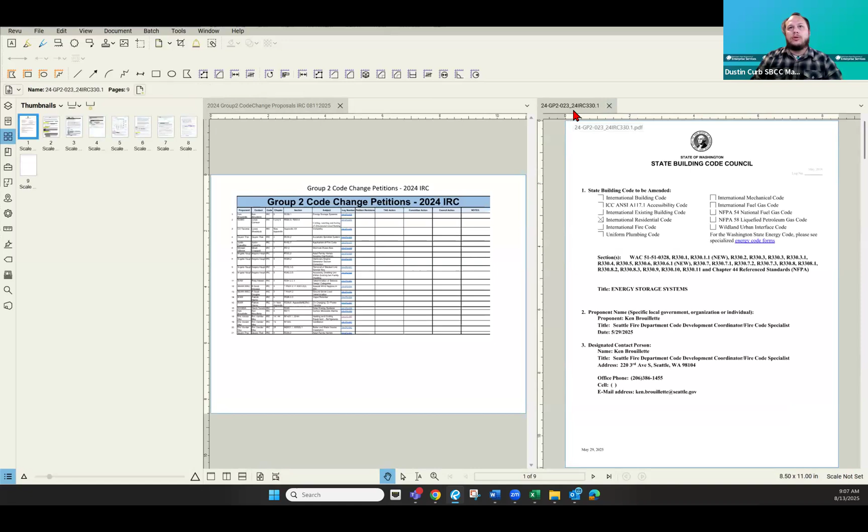So up first, I have a proposal on section R330.1, Energy storage systems, from Ken Brouillette. This is proposal 24-GP2-023. And I didn't expect it to open up like that. All right.

So Dustin, on the proposal, I have a few little slight changes to it. I don't know if you want to make the changes on the document while you're working, or I can show them because I have them highlighted in blue, so somebody could look at what was submitted and then the small changes that were made to it for clarification. So what do you want to do? I'd be happy to make changes, but I'll need to pop it open not as a PDF. So give me one moment here. Yeah.

And also during our discussion, at any time you need to look at NFPA 855, it's referenced in here. I have that available that I can share. If we need to share that, I'll probably have to stop my share and let you share that when I don't have that document available.

Ken, I will be happy to make some changes. You just point me to them and I'll get typing. Okay, we'll do the editorial things first.

So Ken Brouillette, Seattle Fire Department, in the fire marshal's office, put together a code change proposal based on the 2027 IFC code change proposals. The state of Washington, we've been ahead of the game and trying to be a code cycle above. We've done it for our 21 code by adopting the 24 language early. And now we're looking at the 27 language and putting it into our 24 code.

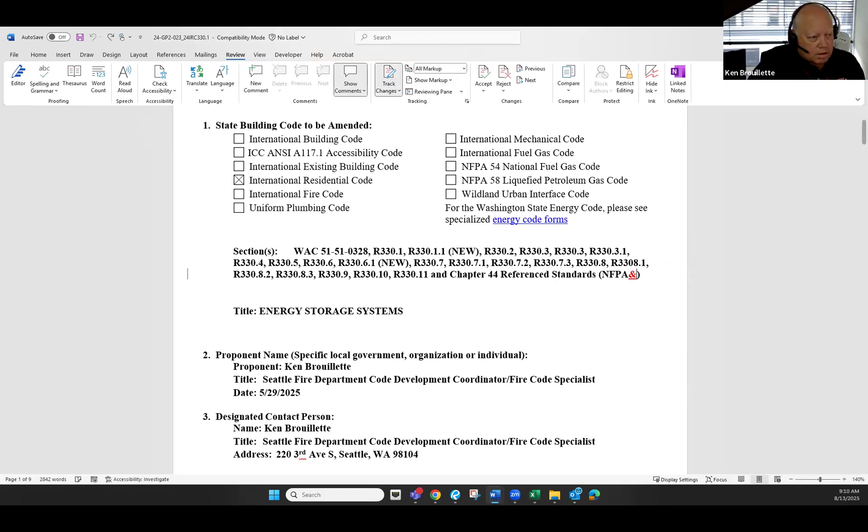All right, and then if you could just scroll down to the section, section 4, there you go.

All right, so what we have at the state is we have some current sections, and we're going to have to renumber some of those. So the first part is...

I'm sorry, let me turn off this phone.

The first change here is the R330.1. So in the model code, right now it says energy storage systems shall comply with this section. And the 27 code amendment clarifies a little bit, and it talks about if they have an aggregate capacity of 1 kilowatt hour or greater, shall comply with Chapter 15 and NFPA 855.

So why are we doing this? The NFPA 855, during their code development process, just finished the 2026 edition, and it's available for pre-sale right now. So it's gone through the entire process. They're just printing it up right now. And that's where all the latest and greatest code provisions are located right now, in 855.

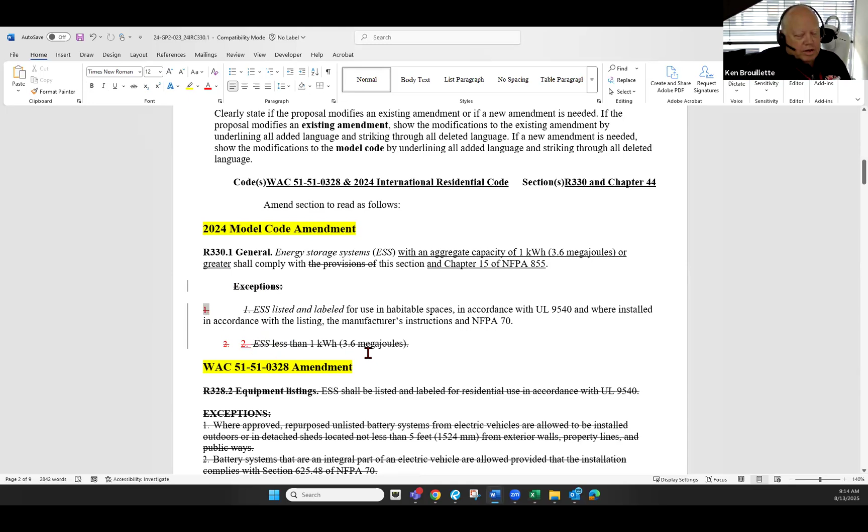So this next part might be a little easier for me to show, and then you can type on your document. So if you don't mind, let me share here. There you go.

Cool. So what I've done here is add in this R330.1.1, which is a section that was brought up for the IFC, the 2027 change, for compliance with NFPA 855 only. And it says the following: ESS systems shall only be required to comply with 855.

So what this means is if you have one of these, you just use 855. You don't use the rest of the fire code. And it says here, ESS systems that comply with all the requirements of section 15.1.3 of NFPA 855, which is this section up here. And I will help show you a little bit here, because this is when it gets a little fun.

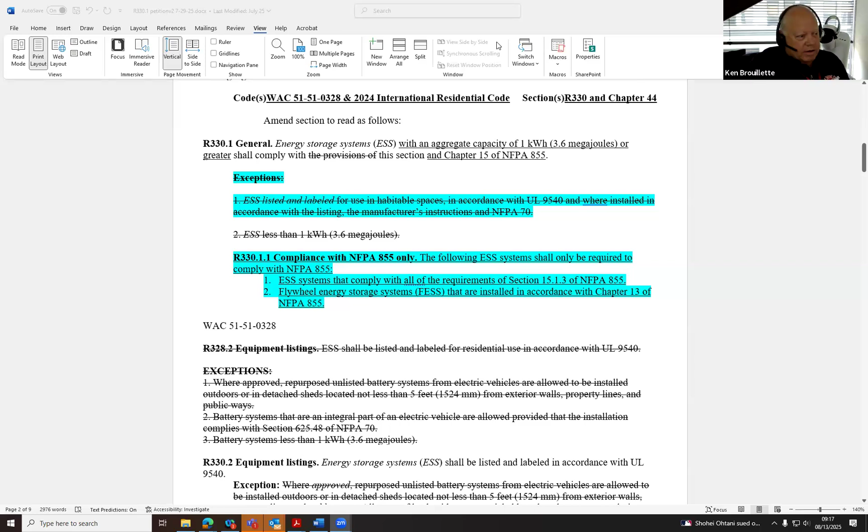All right, I'll let you take back over. Do you need to see this still to keep typing? Just a couple more seconds. Okay.

Okay, you're good. Thank you, Ken. I see Patrick, I might as well call you since I see you. I was just going to suggest, since we don't have a ton of time today, if you just want to run through it with your changes, Ken, and then we can always bring it back at a future meeting with a revision before we take final action. Yeah, so let me just do that with my changes in blue. Okay, if that's all right, I can do that. That makes it easier, that works.

So the other change is under the equipment listing section here: energy storage systems to be listed and labeled in accordance with UL 9540. There are some exceptions for lead acid, aqueous nickel based, and aqueous metal air batteries, but they all still have to comply with this specific section of NFPA 855. So that's just added in there as a reference.

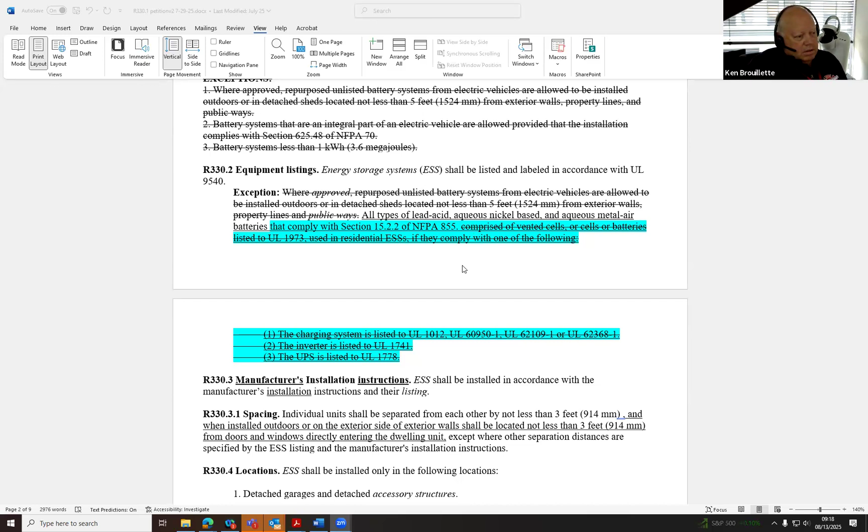And why this is all deleted here is because that's actually that section of NFPA 855. And again, Dustin, I can email this over. I'm done so far, I'm keeping up, but if I get this one back it'll make sure I don't mess it up.

Okay, and we're almost done with the blue stuff, the changes. The only thing I did here at the very end, I had the wrong reference numbers here. I was pointing to the older reference number that was used, so I just updated it.

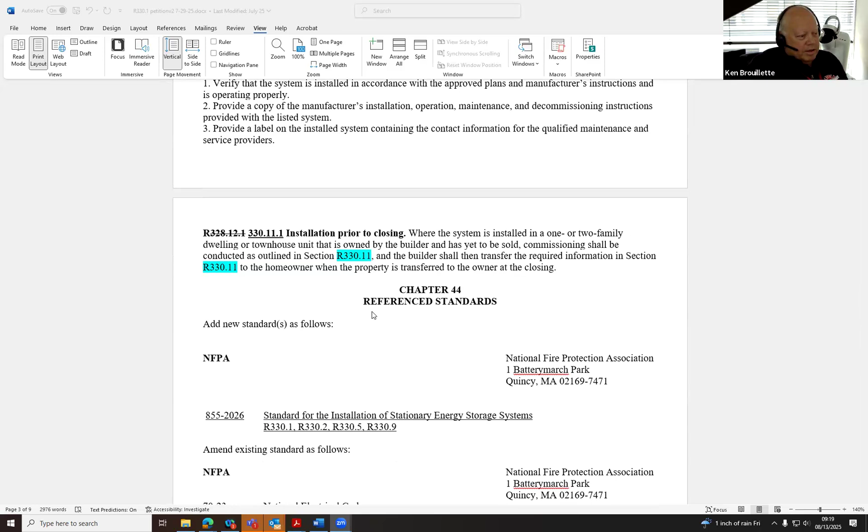And then in the reference standard section, NFPA section, I updated the additional reference sections here and deleted the ones that were wrong. And then the UL 9540, I just updated it to the 2023 edition, and also added in the March date.

I see Quinn's got his hand up. Yeah, so the quick question is, I'm looking at the IFC, the 2024 IFC, and 855 is still referenced to the 2020 version. So would this be a potential conflict if we did the 26 on the IRC, whereas the IFC is the 20? No, I believe my code change proposal for the IFC... because you're talking about the IFC, right?

Yeah, and I'm looking at the code change proposal that you submitted, and I don't see that. So in my public comment, when and if it ever gets out there in the real world, that's going to be my public comment, to update it to 26. I could not do the 26 because it wasn't ready enough, since they hadn't gone through the second reading yet.

Got it. Okay, yeah, that's the reason I kept it at 23. Yeah, because I'm looking at your IFC proposal and it doesn't have any reference to the 855. Yeah, I couldn't, because they just had the meeting, just finished it up, so I couldn't quite go there yet. But that's going to be part of my public comment when, if we ever get that chance.

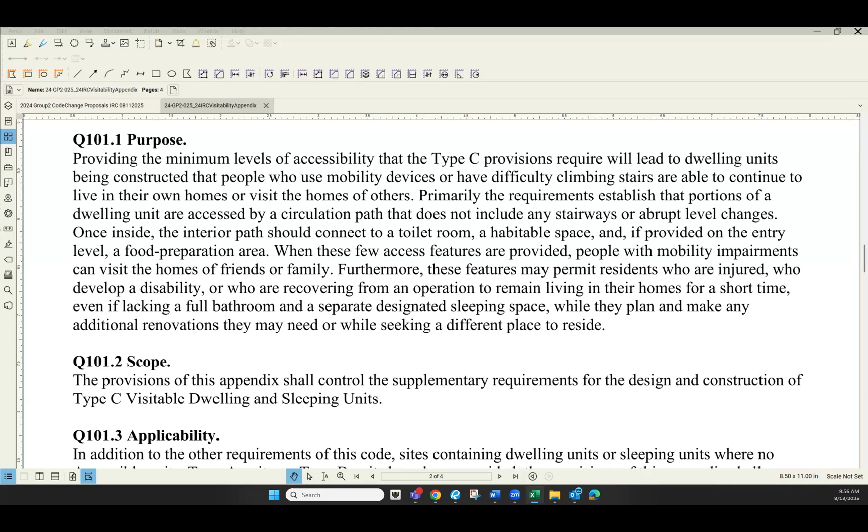All right, seeing no other hands up, we'll move on. And thank you, Ken, for presenting.

The only way you currently get to the sprinkler system is through the definition, which then takes you to the RCW. I looked up the RCW, and it's item F, that sprinklers are required when you have more than 6 and less than 8. So it's already a requirement, but you have to go through multiple steps to get there. So this is just a clear way for designers and building code officials to basically say, yeah, you've got to do it through the IRC, rather than jumping around.

So it essentially brings the requirement that's only in WAC at this point to the code. Not WAC, RCW. Oh sorry, you're right, my bad.

Go ahead, Patrick. Yeah, I mean, I generally don't have any problem with this, but I was wondering, my concern with trying to implement stuff that's in RCW that's very specific, is what if the RCW changes during the code cycle? It could make it confusing. Is there a way we could point to the RCW so that it's clear that's where this requirement is coming from? Then if something were to happen in the middle of the code cycle, it would at least be easier to know that.

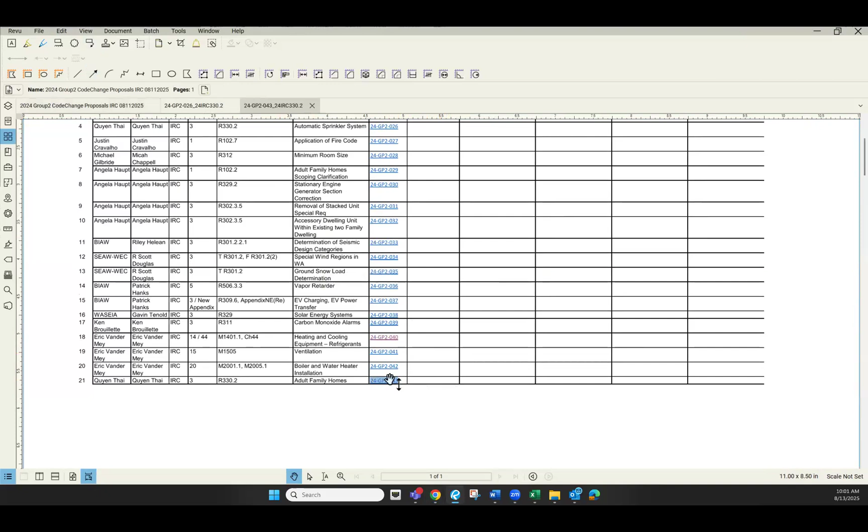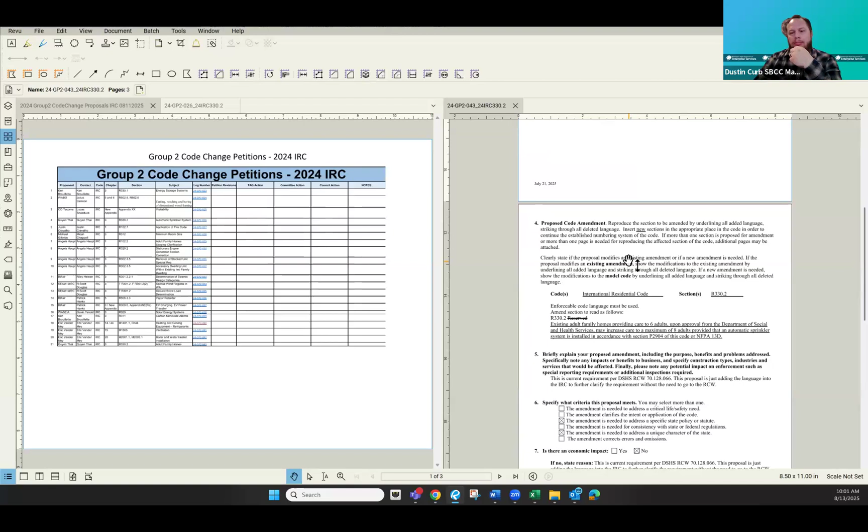So if you go down to the very bottom one, Dustin, that one. Should be the same. I don't think... this might be the only one, a duplicate, and I may have missed this one. Is the language in R330.2 different in each of these proposals? So do we have a favorite, one over the other?

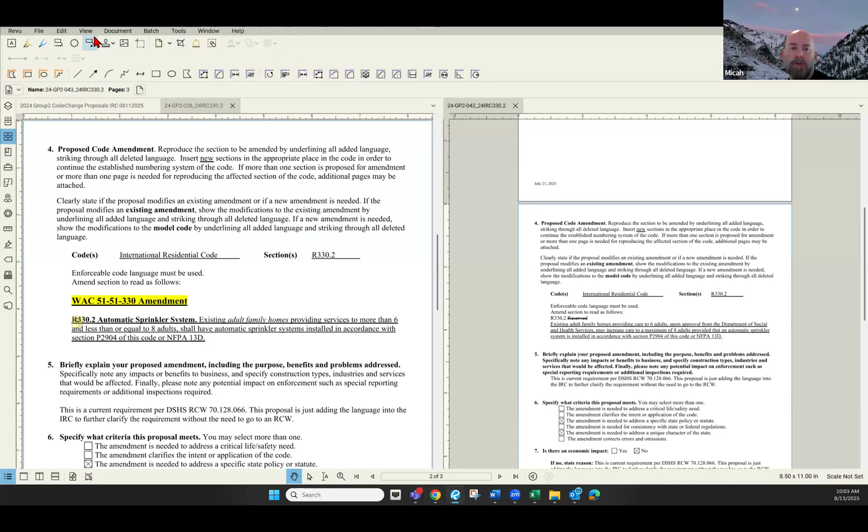That wouldn't undo. I believe the one on the right is technically accurate, but what's on the left is how it's supposed to be submitted. We're supposed to start with the ICC language, which doesn't exist, so it would actually show that this is new language coming into our code. The one on the right is the Washington WAC and how it's shown, and that's not how we're supposed to submit the proposal. So I believe the one on the left is the accurate one for you, Quyen.

Okay, and then I would say stick with the current language we're proposing because it does match the definition when we start getting there, the up to 8 adults or whatever, things like that. There's 10 different ways you can write it, but I think this aligns more with the WAC language from DSHS, however you say it.

I believe the one on the right was part of the alignment we've been doing with them for the last couple of years, where they've been working closely with code officials to get language and components aligned, so we're not out of step. Many of you may not be aware, we didn't have much alignment previously - they were allowing waivers for up to 30 kids in a residential house at one point. So this is just further aligning the codes and their requirements, since we're now seeing these come into our offices. Hopefully you'll support it. Thanks.

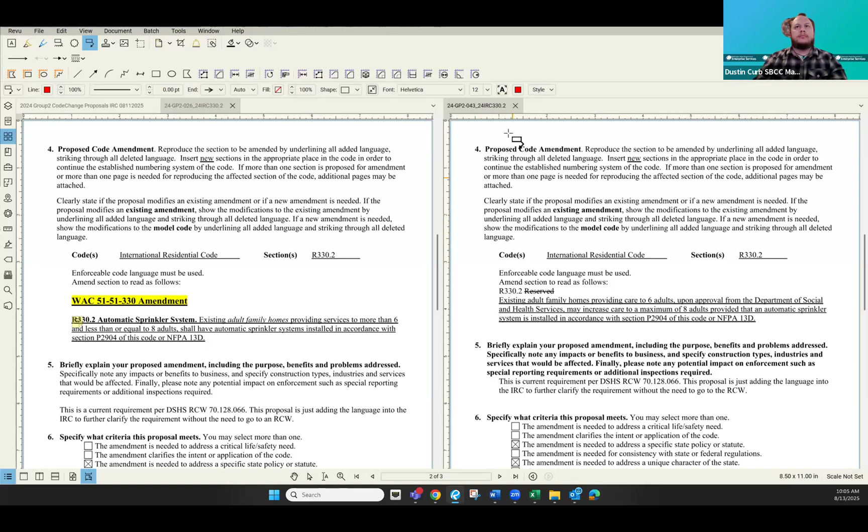Would it be appropriate, Quyen, to withdraw this one on the right-hand side, number 043? Correct. I think that was my original, and we changed it to the one on the left, so I'm not sure how you got the one on the right. It might have come separately and been far enough on our spreadsheet that I didn't correlate them. No worries, get rid of the one on the right.

Any other questions for Quyen on number 026? The code section will probably change based on the model code. Yeah, we'll just make sure it fits in where it needs to go.

Jen? The existing adult family homes here seems a little weird. I get that in the definition because adult family homes have been 6, and DSHS will only allow existing ones to increase, but that's more their deal, right? But here, when is a sprinkler system required? I don't know that we need to condition it on being existing - I just want us to think through that more. Whether it's new or existing, they could change, because they have that deal where they want to wait 2 years before allowing an increase. That may change - they may say if you're putting a sprinkler system in, go ahead and start with 8. Then we'd have this situation where only an existing one requires it, and a new one wouldn't. So maybe we just get rid of 'existing'.

So just get rid of the word existing and start with 'adult family homes providing services to more than 6.' And I do like Annie's suggestion to just say 7 or 8, or 'more than 6' could be enough, since DSHS will limit them to 8. That's the problem with that definition - DSHS is going to do some things, but let's just put in here what we are requiring. Whether or not DSHS requires a sprinkler system, I think this group would want one for 7 or 8 people.

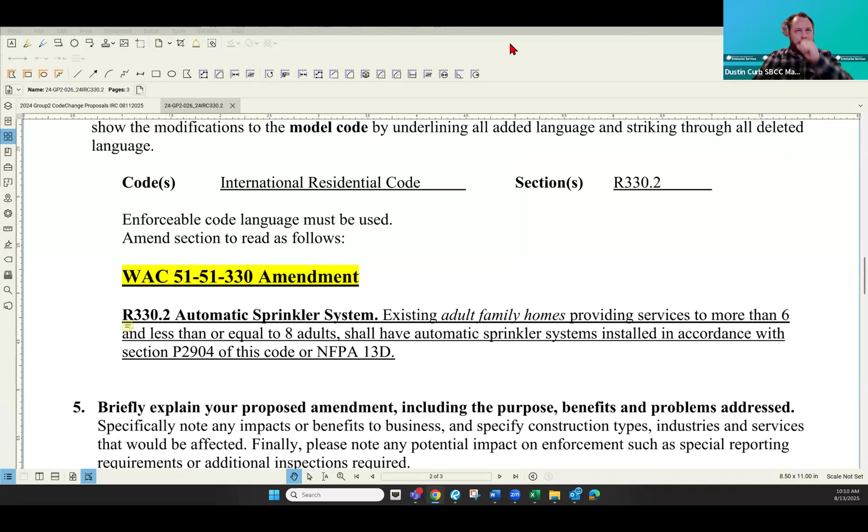To Justin Cravalho, IRC section R102.7, application of the fire code. This is 24 GP2027, and Justin is online with us. Let me get it pulled up and I will turn it over to you to guide me.

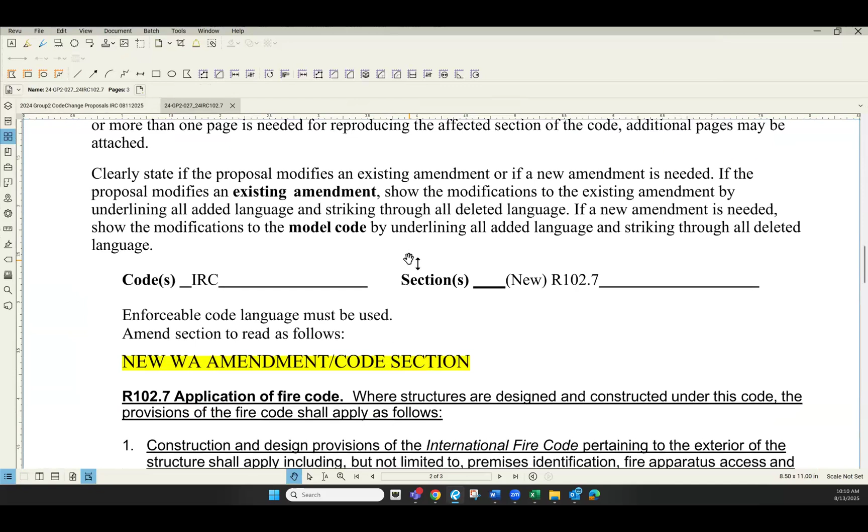All right, thank you. So I just wanted to be clear with this one: this is not meant to replace or amend any existing sections, it's just supposed to be a new section added in. This is essentially adding in language that's already in the fire code, copying that over and editing the names of the codes to fit where it is now.

It was brought to our attention that number 2 in this amendment would potentially conflict with duties and responsibilities of the building official, so we were asked to strike number 2 from the proposal. But other than that, it's just meant to be a clarification of the code to make it clear that in addition to the residential code, you also have to comply with the fire code if your jurisdiction adopted those access requirements.

So there's a plan then to submit a version that has just number 2 struck from it? Yes. As well as any other amendments people would like to see.

Any comments or questions for Justin? Ken?

So you'll just need to update the reference standards section to point to 102.7 since you're referencing the IFC, just for clarity.

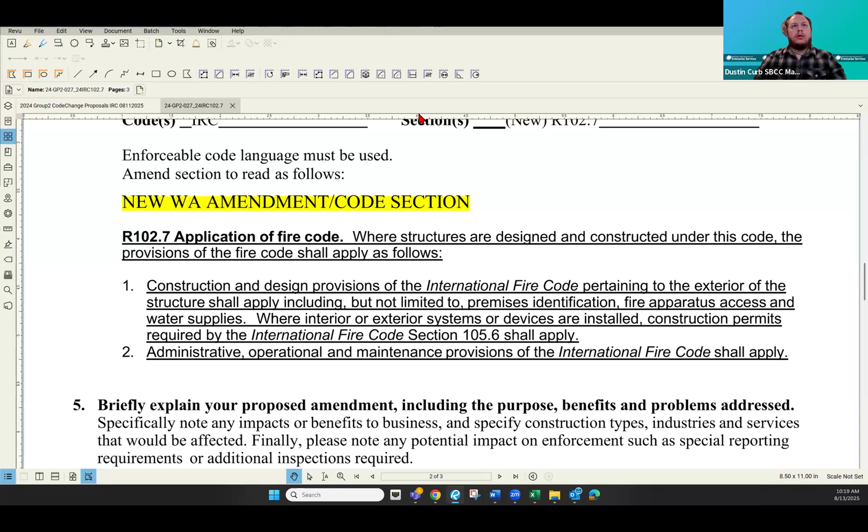Moving on to Michael unmuting so he can present on number 028 for minimum room size in section R312.

Hello, good morning, Michael Gilbride. I'm a building plans examiner at the City of Seattle, and our proposal is for the minimum room area. The overview is basically we are shifting the requirement from a minimum room area to an overall minimum area for a dwelling unit. So dwelling units shall have at least one habitable room with a minimum floor area of 120 square feet and not less than 7 feet in any horizontal dimension. This is a change from requiring every habitable room to be 70 square feet.

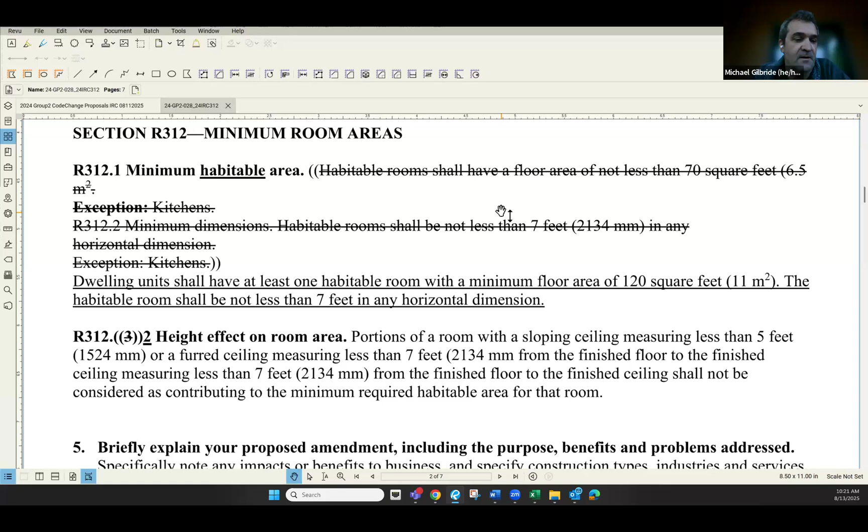The purpose of this is to allow for smaller separate rooms. Typically, we've been seeing offices off of the main area, a bedroom or the main room, that are separate and less than 70 square feet, but don't present any fire safety, health, or livability issues because they're in a larger dwelling unit or house. So Dustin, if you want to go down to the diagrams on the last page, that might be easiest.

So I think it's all the way at the end. There's some diagrams, here you go. So this is sort of what we are seeing.

I think the code has remained the same for a very long time, but the residential trends have changed, and this configuration seems to be more and more prevalent.

In addition, currently the code doesn't really have an overall area minimum for dwelling units. This is the only area requirement in the residential code.

So our change now allows for dwelling units to have a minimum area requirement to meet minimum livability standards. That is the overall intent of this proposal: to allow for smaller separate rooms, provide some design flexibility, and also bring in a minimum dwelling unit area as we see more ADUs and DADUs start to come into play.

And if you scroll down to the other diagrams, you'll see this is what can currently be built under the IRC. And then this would be allowed, and this is sort of the minimum area, an example of a small minimum dwelling unit.

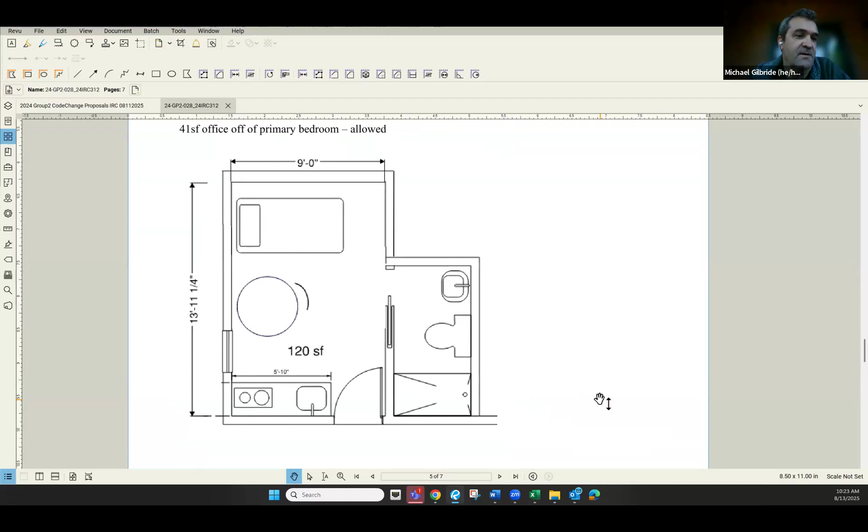So I think that is the purpose, to provide the flexibility and also start to address some of the changes that are coming with the middle housing and other legislation. And Dustin, if you want to just scroll up to the benefits, I think that might be a good place to end.

There you go, right there. And yeah, I'm open for questions and discussion.

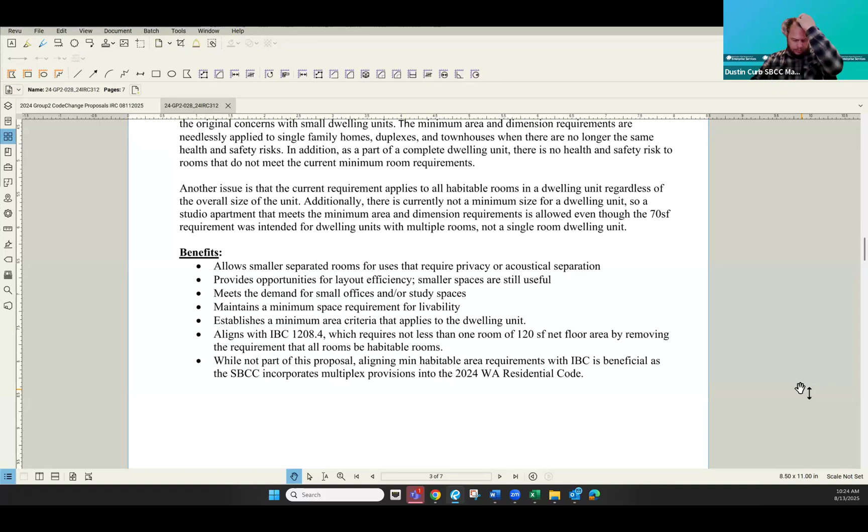Patrick: Yeah, thanks for bringing this forward. I actually like this, I think this is overall a good change, and I've actually lived in a 120 square foot dwelling unit. It's a little tight, but it gives you an affordable place to stay when you're going through college or just starting out.

I was wondering, I know that the 120 square foot is kind of the minimum in the IBC, and I think it's been that way a long time in New York, but is there any reason we couldn't go lower, like say 100 square feet?

You know, I think that has been discussed, and we go back and forth. I think we kind of landed on 120 square feet because of the alignment with other codes. I think where that exact livability minimum is, is always sort of a hard question to pin down, whether it's 120 or 100.

I think 70 seems very small to me for livability. Trying to fit all of the requirements for a dwelling unit in that small of a footprint is very difficult. So I think 120 is where we ended up.

Okay, and then I have one other question. I think my only potential concern is, theoretically right now you could have a dwelling unit with rooms that are 70 square feet, but under this they would have to have at least one bedroom that has 120 square feet.

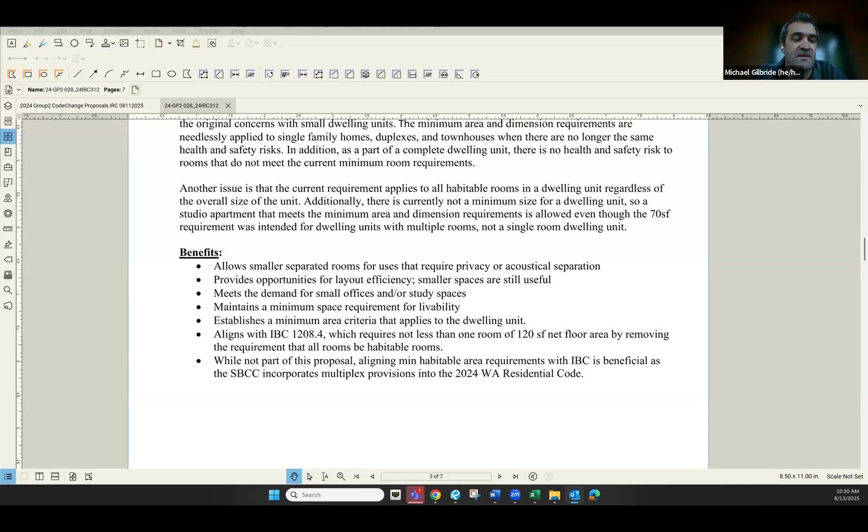That's great, but can we scroll back up to the code change proposal? You don't mind, Dustin, and we can have a little more discussion there. I know a lot of folks are talking about the minimums right now. In the residential code, remember this is a residential code change.

You could have your one habitable room be 70 square feet at this point without a bedroom. That's what the code allows. So thinking that you're getting larger now, you technically are not required to get larger now. This is actually setting a little larger minimum for that one room that you are required to have. Now, when you provide other habitable rooms in your design, those would have to meet the 70 as the current code reads. But again, you don't have to provide those other habitable rooms in the residential code.

So I definitely want to point that out. And then some of you may already be aware, the state legislature did pass some language that says we need to look at allowing smaller dwelling units in the building code. So there are proposals that are going to come in for that, but this is somewhat aligning with that direction, in that we're providing some much needed flexibility on the dwelling unit sizes and minimum room sizes in the residential code. And then we're going to get the building code later. Anyway, thanks.

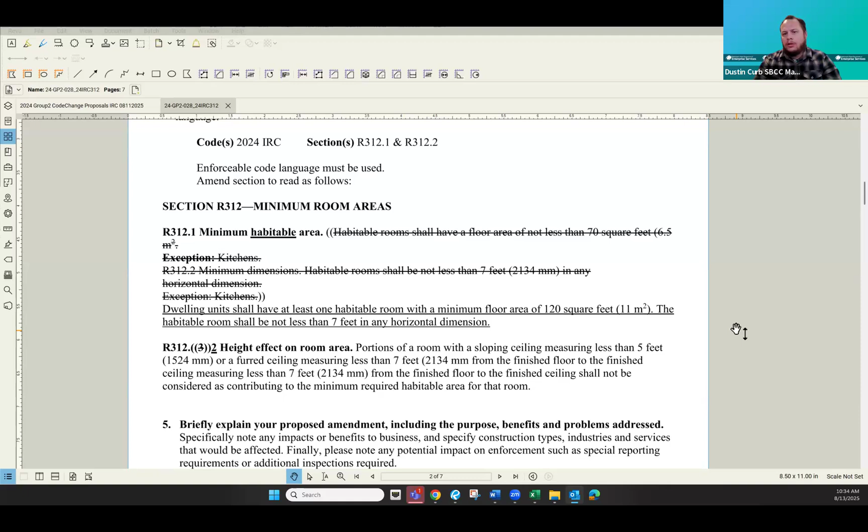Any other questions or comments? All right, seeing nobody else unmuting or raising hands, appreciate it, Michael. And we will move on. All right.

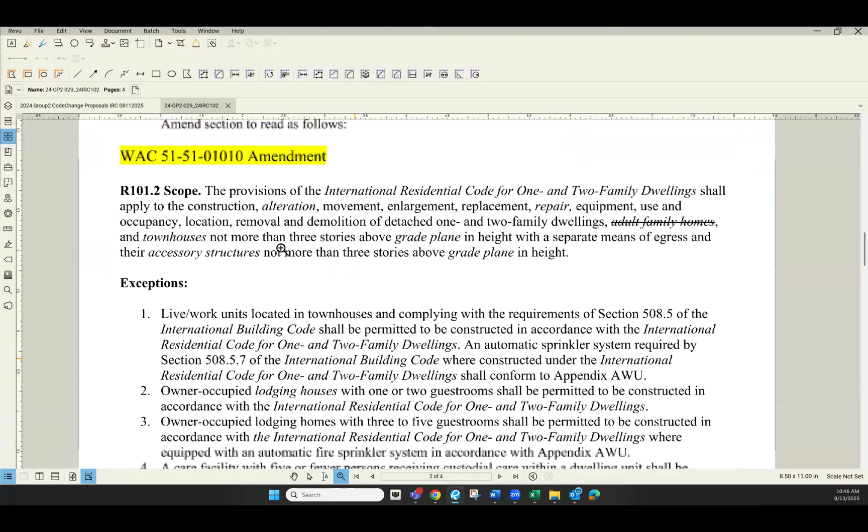Yeah, this one should be fairly easy, I say that. So it's basically a clarification to go along with an SBCC interpretation that was made earlier, last year I think. It just has to do with making it more clear that adult family homes are not required to be sprinklered in order to be built under the IRC. So instead of having it in the scoping where some people were trying to throw it into the care facilities exceptions, I added it as exception number 7 that says adult family homes shall be permitted to be constructed in accordance with the International Residential Code for 1 and 2 family dwellings. So I don't know if there's any questions on it.

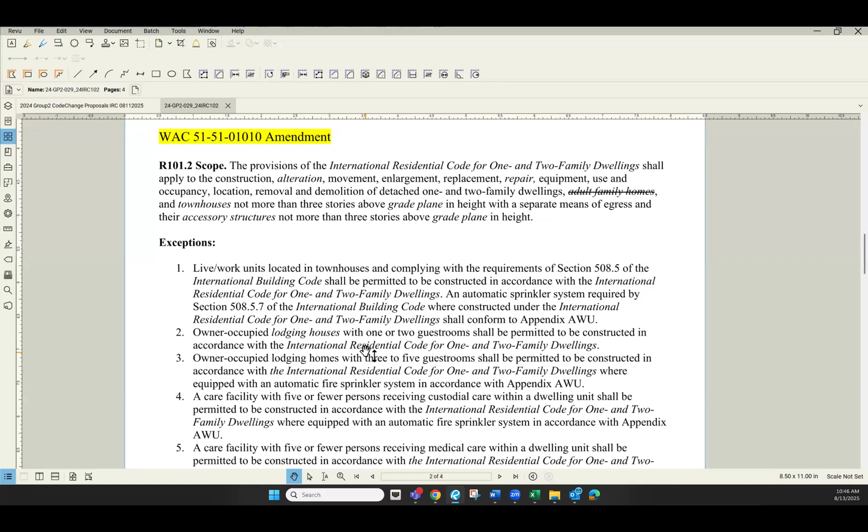See some thumbs up in the group. Anybody with comments or questions for Angela? All right, see nobody coming up. We will close that one.

The next one is also from Angela, R329.2, stationary engine generator section correction. Oh, I want to withdraw that one. Okay, that's quick and easy. So let me update some notes here real quick.

Okay, the next one is also from Angela on R302.3.5, removal of stacked unit special requirements. This is proposal 24 GP2031. So for this one, this is a proposal to remove this new section that was added to the base code. Basically, it's a section that was added to try to counter all of the states that have been removing the sprinkler requirements from the IRC. What this section does is it adds a sprinkler requirement back in for just stacked duplexes.

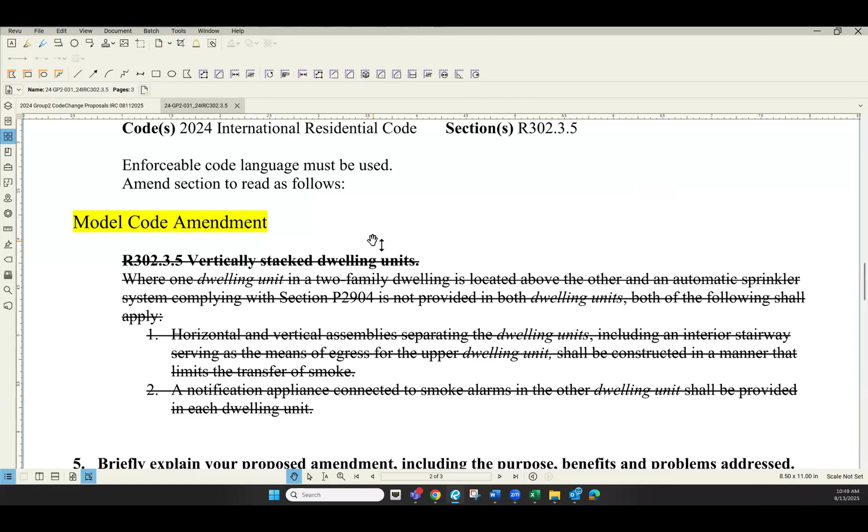Which would go against the state's current stance on making sprinklers an option in the code. So again, are there any questions? I see a thumbs up from Patrick. Nobody's unmuting. Thumbs up from Mariko. All righty.

Moving on. This is also Angela's proposal for R302.3, an accessory dwelling unit within existing 1-family dwelling, proposal 24 GP2032.

Okay, so this one is a little bit more complicated. First off, it removes the term accessory dwelling unit and just refers to it as a new dwelling unit. The term accessory dwelling unit is not defined in the IRC, but accessory structure is, and they don't mesh together. So in this proposal, I've gone on to remove the word accessory and just make it new dwelling unit.

Also clarified that this applies to an existing 1-family dwelling unit, that you can't do this like within a duplex to make it 3 dwelling units. It does change a few things on it, so I want everybody to read it and make sure that what it says, they agree with. It also removes exception number 2 from R302.3.1 because it's a duplicate of what's already stated up in R302.3. So instead of having it in 2 places, it's now in just 1.

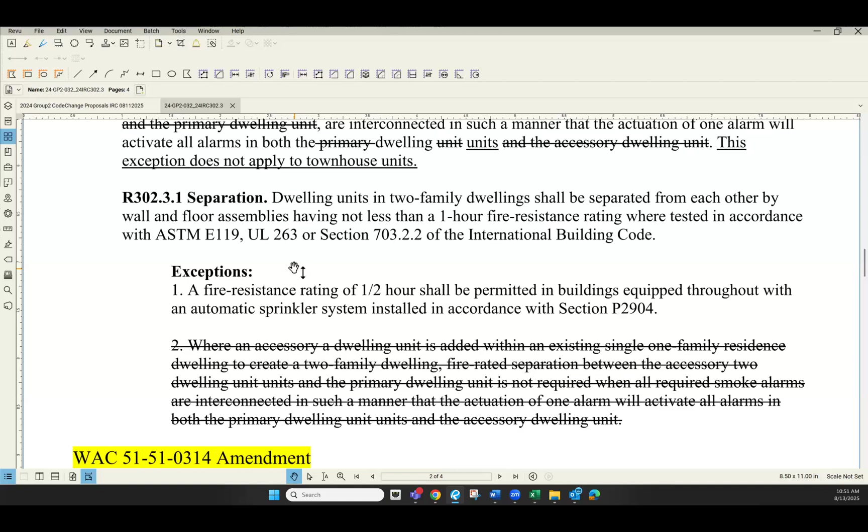And then the second part has to do with, in alterations, repairs, and additions, it's referring you back up to the top when you're doing, where 1 or more sleeping units are added or created in the existing dwelling unit. So that section is just reverting you back up to the top to make sure you are complying with section R302.3 for that new unit. And again, it's some language changes to remove the word accessory.

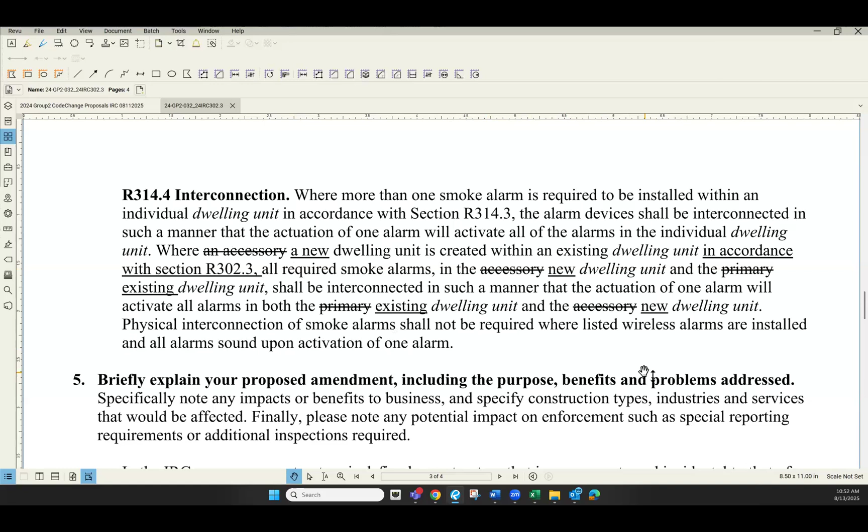Alrighty, Ron, I see you unmuted. You have a comment or question? Yeah, currently, if you have an ADU, it does not have to have the 1 hour separation from the main dwelling unit. Is this taking that exception out? No. Okay, thank you.

Jen: I think it is, because adding a dwelling unit inside a 1-family dwelling would create a 2-family dwelling, right? When you add another dwelling inside a 1-family dwelling, now that's a 2-family dwelling, and then it would need to be separated. Right, but it says 1 new dwelling unit constructed within an existing 1-family dwelling need not meet the construction requirements of 302.3.1 through 302.3.5, which are your separation requirements. Okay, thanks, sorry, it's so hard to try to read this and think and listen at the same time.

That's where instead of saying it doesn't have to be considered a separate dwelling unit, the confusion has been: if you're not considering it a separate dwelling unit, are you requiring access to the electrical panels, separate heating controls and things like that? Because if it's not a separate dwelling unit, none of that technically should be required, yet it's still sort of a leasable dwelling unit. So that's what we're trying to clear up by removing 'considered a separate dwelling unit' and just saying it doesn't have to meet the construction requirements. Because when this was put in the code, the proposal was about basements or garages where you can't really make an existing wall one hour, or make head height without altering the ceiling. So again, it was more just to get out of that separation, and that's what I'm trying to make more clear here.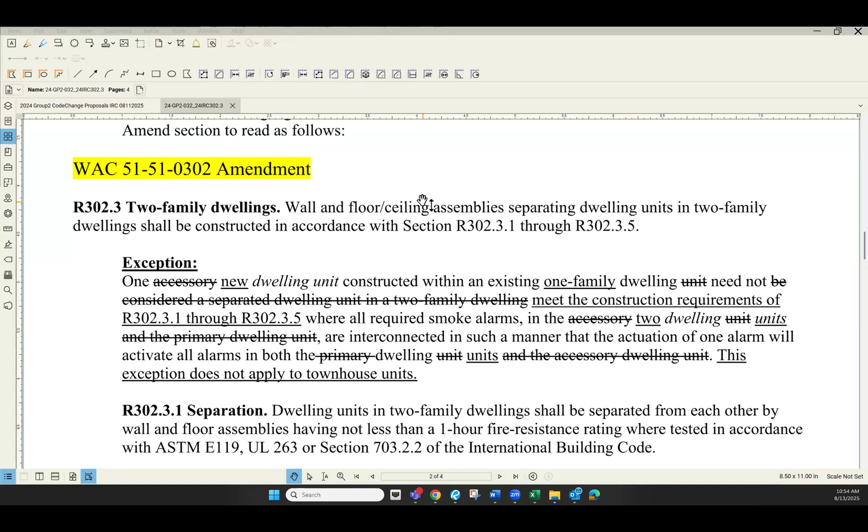Any other comments or questions? All right, nobody's unmuting, no hands are coming up. So I believe that was your last one, Angela. I appreciate the presentations.

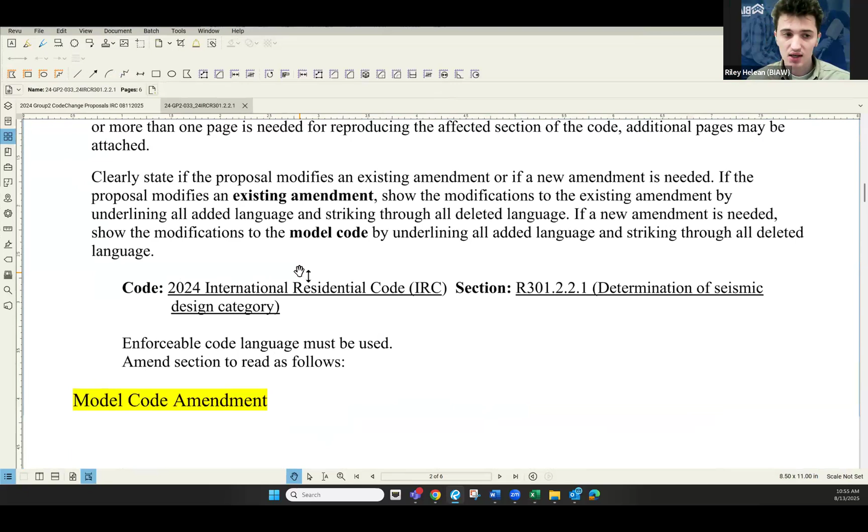All right, now we are on to a BIAW proposal from Riley Helean on section R301.2.2.1, the determination of seismic design categories, proposal 24 GP2033. I think I saw Riley on earlier. Yep, there he is, so the floor is yours. Yeah, my name is Riley with BIAW. We received some member feedback on this, so we're proposing that we do not adopt the seismic design category map from the 2024 IRC. Instead, we're recommending we retain the figure from the 2021 IRC.

Essentially the 2024 IRC changed to using one seismic map. They were hoping that would streamline the viewing of them nationwide. They acknowledge that this results in some more conservative estimates, making many coastal regions jump up. I don't know if you'd be able to pull up the one from the 2021 IRC for comparison, if that could help. It jumps up many of the regions on the Pacific coast to SDCE, which is the highest risk category. Washington's soil and earthquake risks are different, so this map can overestimate the danger here. It results in overbuilding and higher costs, so we're proposing to retain the 2021 map.

Thank you. I'm still trying to pull up the figure from the 2021 code, so give me just a moment. While I'm doing that, is there any comments or questions for Riley?

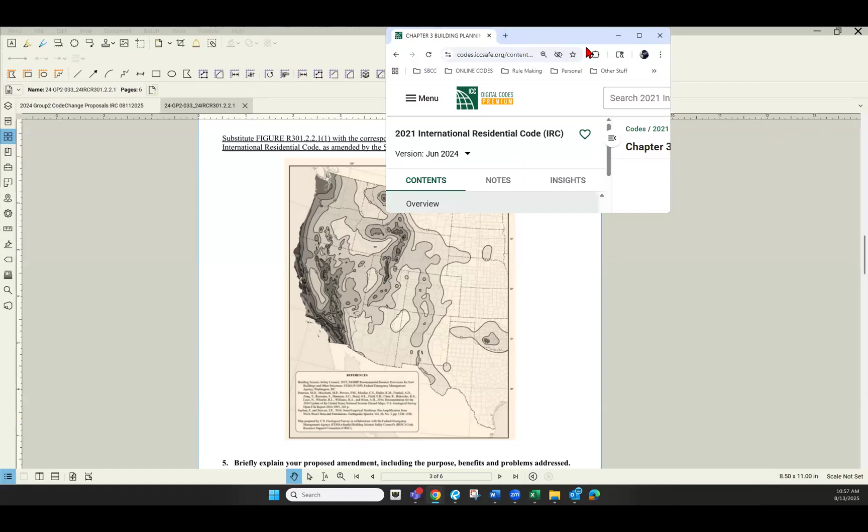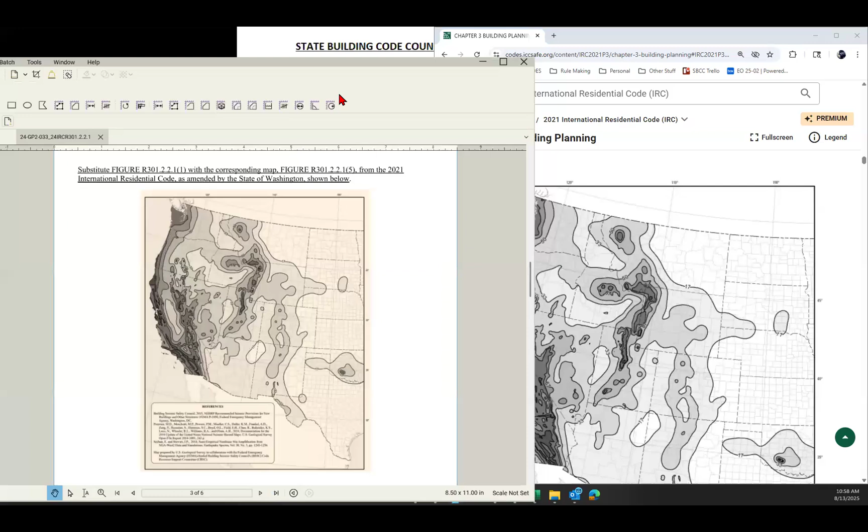Annie: just a couple of observations. It'd be interesting to get comments from the engineers on the call. The peninsula at this point has a small dot of E over the city of Port Angeles; everything else is D. What we're finding by using the ASCE hazard tool is that we're not finding E in Sequim or Port Angeles, not finding E anywhere on the peninsula. One question I have for the structural folks is whether the ASCE 7-22 is being adopted by reference in the 2024 codes. I had the one engineer we have on the peninsula look at this and give me some background, and if the definition of S sub 1 changes, we'll see additional E along the coast only. Also, if you look at the IBC seismic map, you'll only see E along the coast. The challenge is that as soon as we get into seismic design category E, everything needs to be engineered, and that's tough when you're on the peninsula with just one engineer. It winds up being a real tough ask, especially if we're not finding that it actually meets those criteria.

I also received an email from somebody who's not able to be at this meeting today, who wanted to submit a comment for this particular proposal. I'll pause for Josh, and then I'd be happy to read this email for this individual.

Yeah, I was just going to comment on some of the questions addressed towards engineers on the phone, since I'm one of them. The ASCE 7-22 is being adopted by the IBC. As an engineer, I'm designing every house to the IBC. I don't know many engineers who are using the IRC for design. So unfortunately, as it comes to prescriptive analysis, I'm going to be a little less experienced, but I will say the ASCE 7-22 does have a general increase in seismicity across our state.

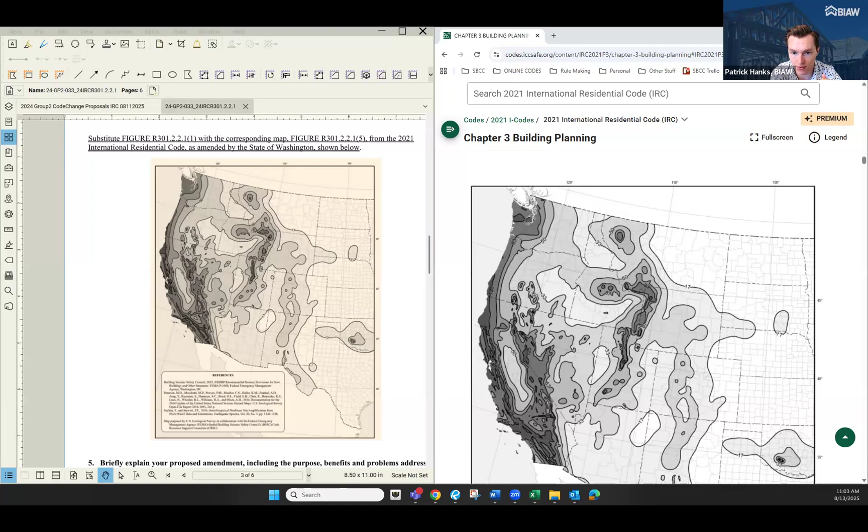Patrick? Yeah, I think the concern here is, while the proponents at the ICC level said that it was based off data, when you go look at the hazard map tool for Washington and go into these areas that are now classified as E, you're not seeing that in the tool - they're not classified as E. So it seems like they made some assumptions, some generalizations, when they made the maps that result in large portions of Washington being upgraded in seismic zone, contradicting what the tool said.

I know there's a desire for consistency, but if we require structural engineering for every single residential structure, not just on the peninsula, but parts of the Seattle metro area too, and other parts of Washington, that's going to significantly increase not just the cost, but if you can't get a structural engineer, it could delay your project, affect the feasibility, and affect a lot of things really negatively.

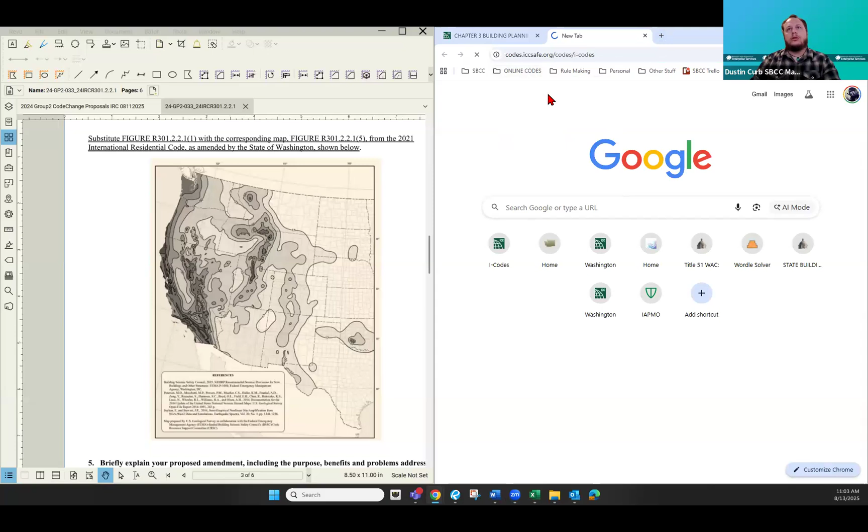Annie: Dustin, could you bring up the seismic map from the IBC? I think it's 1613.9 or something along those lines? Yes, 1613.9. Are you looking for the 2024 map or the 2021 map? 24.

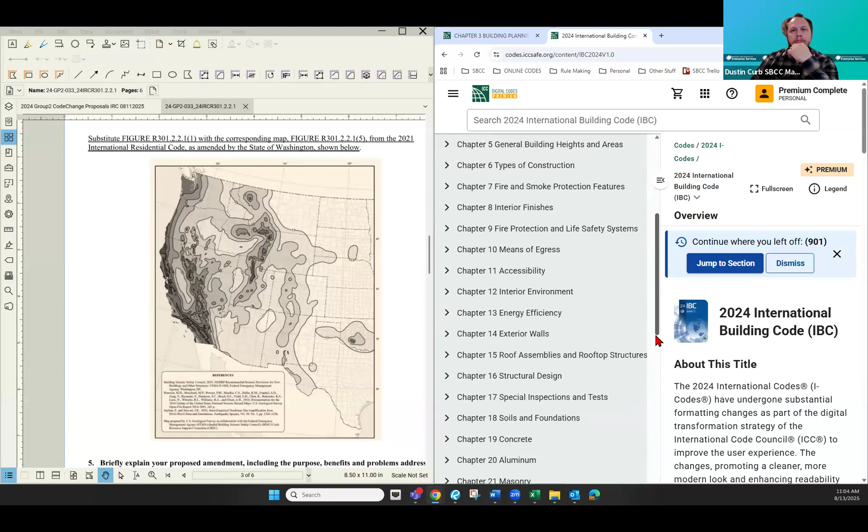While I'm pulling this up, can I entertain another comment from Julius? Go ahead, Julius. Can't hear you, Julius. Can you hear me okay now?

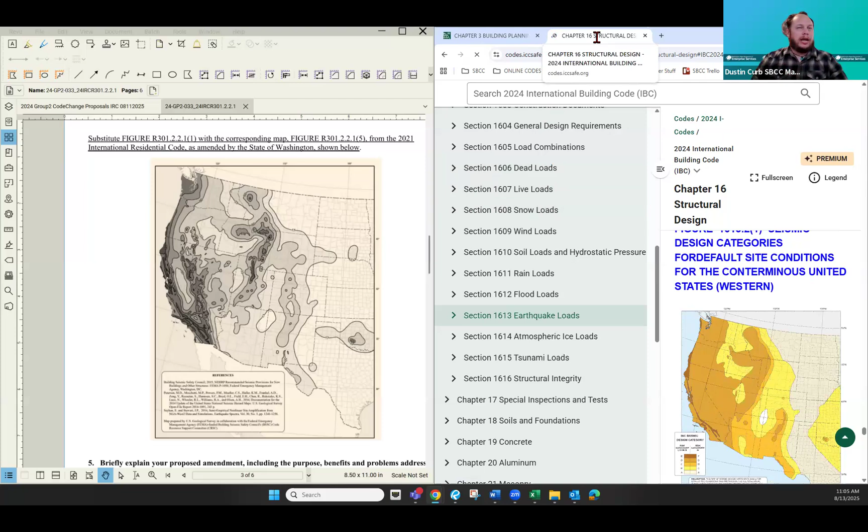Yes, yeah. Can you go to IRC 301.2.2? That's the alternative determination for seismic category. Okay. What I was going to say is, if I'm going to different code sections, let me just finish up with Annie's comment, and then we'll navigate to the IRC.

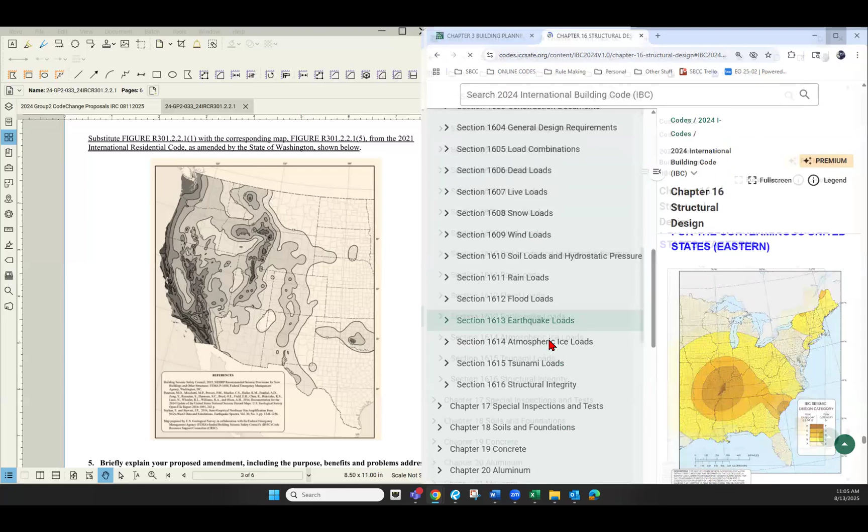Is this the map you're looking for, Annie? Yes. Yeah, if you go up to the western part of the country. Whenever I change the size of the window, it bounces around, so apologies. Okay.

This is more consistent with what the engineer has found when looking or utilizing the ASCE hazard tool.

So when you're talking to the engineer you're working with out there on the peninsula, this design map is more consistent with what's published in the IRC when designs are required and what people are using, is what you're saying, Annie? This is what he's discovering when he utilizes the ASCE hazard tool, that along the coast we're in seismic design category E, and the balance of the peninsula is in D.

Okay, so that little dot that's in Port Angeles is not relevant according to that design tool? We have not been able to find an area in Port Angeles that's actually E. Okay, any comments back to Annie on that one before I move on to Julius?

All right, Julius, where would you want me to navigate to again? R301.2.2. But just to 301.2.

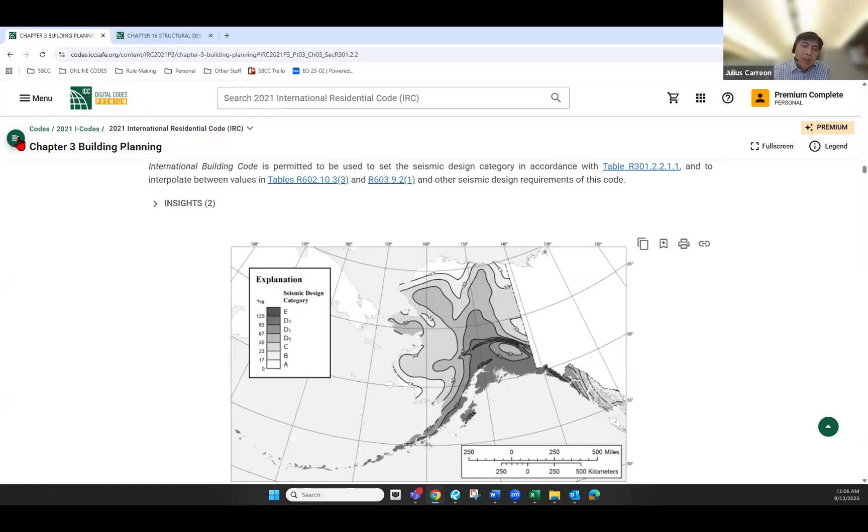To rebut Patrick's comment about the ASCE 7, when you use the ASCE 7 hazard tool, it will give you a seismic design category for a specific site, but that's for the IBC. The IRC has a different seismic design category, and those are a little different. So the...

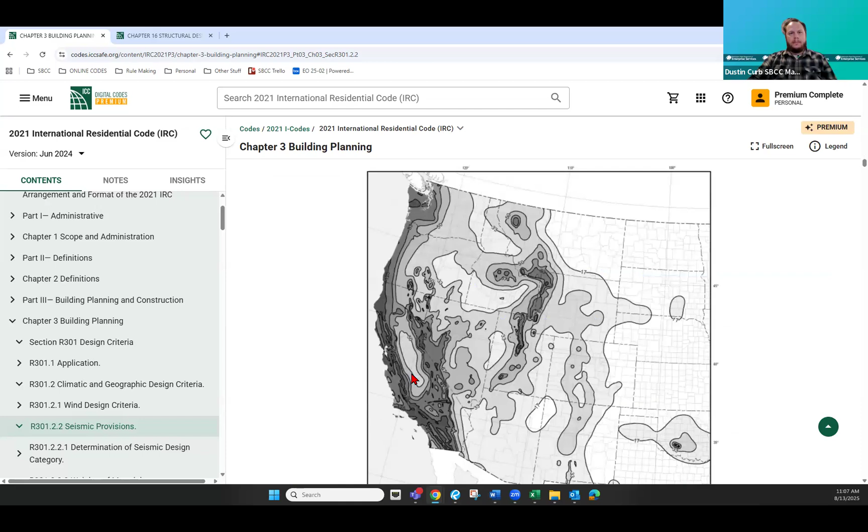28, if you go down a little bit, 301. Oh sorry, 301.2.2, go down a little bit more. A little more, I think you're getting there. After the maps, after the maps. Okay yeah. Oh okay, gotcha, right.

So if an engineer wants a more refined... oh, not this one, this is IRC 2021. IRC 2024 is the one we should be looking at, because in IRC 2024 it is true that most of the Western Washington area might be classified as seismic category E, because the seismic hazard in our area in general is increasing based on the latest science.

But the IRC provision has an alternative determination: when you're in seismic design category E, you're allowed to go to seismic design category D2. So you go down a bit based on this provision right there. Just 2.2? 2.2.2.1. Oh, not that one, sorry, go down after the maps.

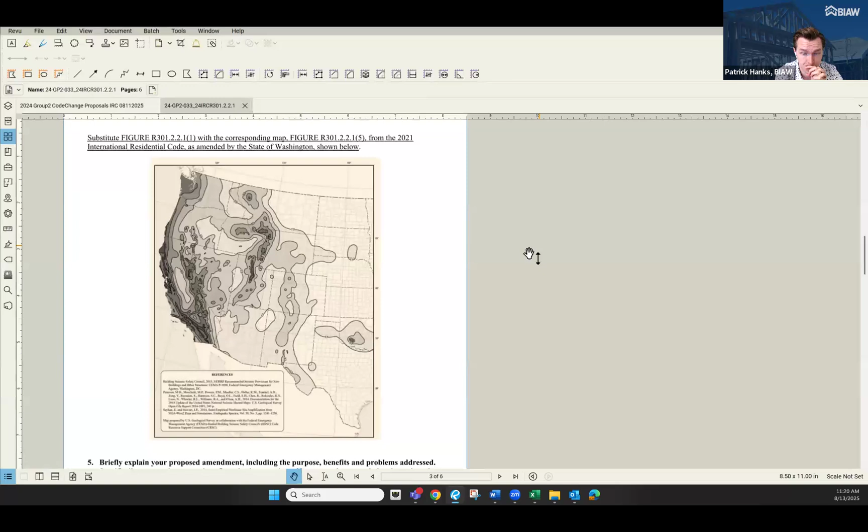Josh responded: I'm hoping someone else can help me out with this. My understanding, Patrick, is that's not only the intent of ASCE and the people developing these maps and IBC and IRC, but that is how we're supposed to do it. My understanding is the maps are no longer the official source of information - they're for illustrative purposes. Though I'll admit I haven't been able to track down confirmation of that. So hopefully other folks here can help me see that, but the maps are not the official data source anymore, and my understanding is you're required to use the ASCE site. I don't know if that's how everyone's enforcing it or if I'm just under a misconception. If other people have better information on that, I'd love to know.

In the IRC, they have other factors - they have K-sub ZT, right? Like in the city of Tacoma, I think we do a default, no matter what, of K-sub ZT of 2. But many times they can actually calculate the K-sub ZT for wind - this is wind, if people aren't aware - where it's actually a lower value. We've mapped our whole city where you can use a lower K-sub ZT and use that.

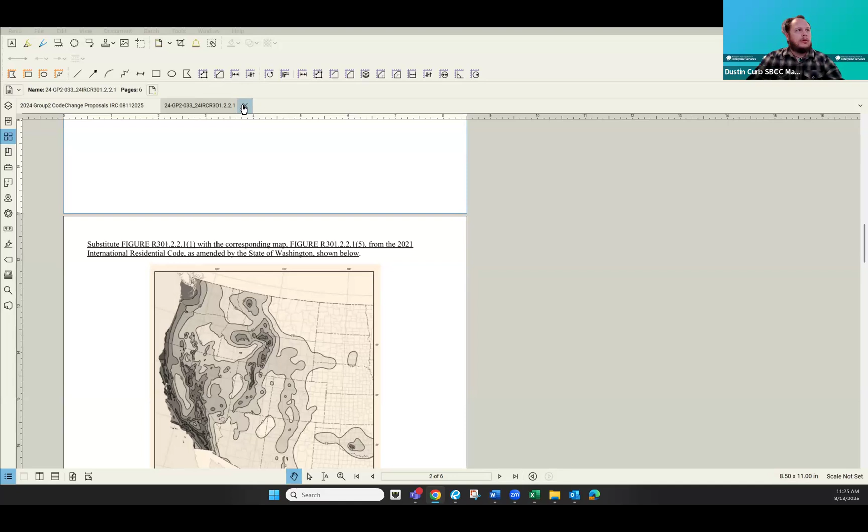All right. Thanks everybody for the discussion on this one. We will move on to, I believe it is 034.

This one's from Seattle, I forget the acronym, but Scott Douglas is the proponent, or the contact, and this is for table R301.2 and figure R301.2 number 2, special wind regions in Washington. Scott, you are online, so let me pull this up and turn the floor over to you. Okay, thank you.

The purpose of this proposal is to align our current state building code proposal 24-GP1004 with the state residential code. Figure R301.2 parentheses 2 of the IRC identifies by cross-hatching the special wind regions in Washington state, and these regions are along the Pacific coast.

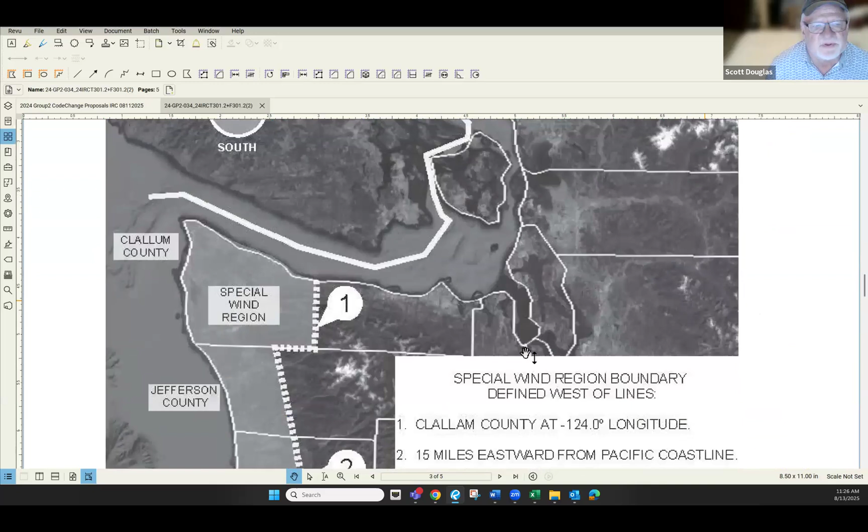Yeah, I can maybe just zoom in, get it full. Yeah, okay, there we go. So the special wind regions are along the Olympic Peninsula, Pacific coast, and along the west end of the Columbia River. And the current wind maps, including the special wind regions, are identical in the IBC and the ASCE 7 wind maps.

Currently, both the IRC and IBC specify the AHJ to determine the wind speeds and boundaries in these special wind regions. The special wind region speeds are estimates based upon limited information, and consequently they're inconsistent from jurisdiction to jurisdiction. To eliminate these inconsistencies, the Structural Engineers Association of Washington commissioned a study based on state-of-the-art analysis with up-to-date data, and the results of the study are shown in this figure, which is in the proposal.

Right now, existing figure R301.2 parentheses 2 footnote 6, and table footnotes D and I in table R301.2, will be revised to reference this added figure and specify the IRC special wind regions as 120 miles per hour.

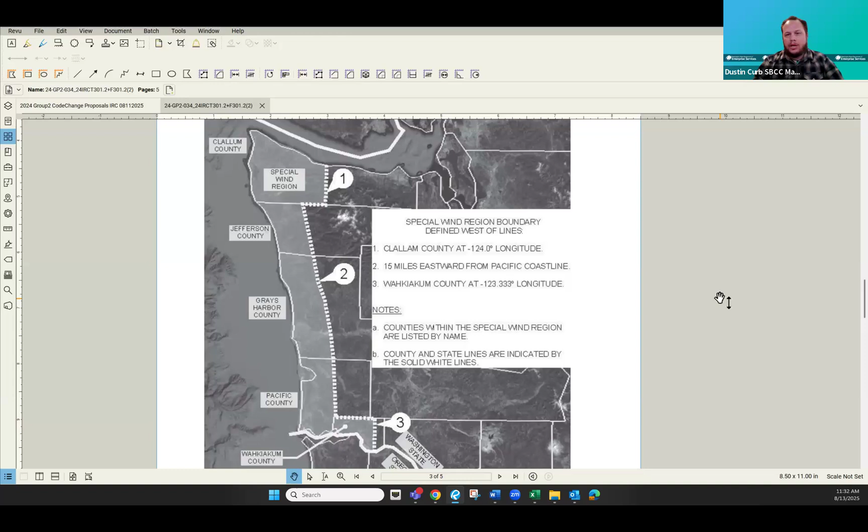We do have another one from Scott for the ground snow load determination, table R301.2. So this is 24 GP2035. And Scott, the floor is yours once again.

Okay, maybe if you could scroll down to the figure. Right there, yeah, that's good. This had Julius's help with that, I appreciate that. This just modifies footnote O of table R301.2. And instead of just stating figure R301.2 parentheses 3, it deletes that and says determined from section R301.2.3.

That section references both the figure and lets you go use ASCE 7. So it's more accurate, and it gives the option of either. This technically, just the figure limits you. This note should have actually referenced the section to give you both options to determine the ground snow load.

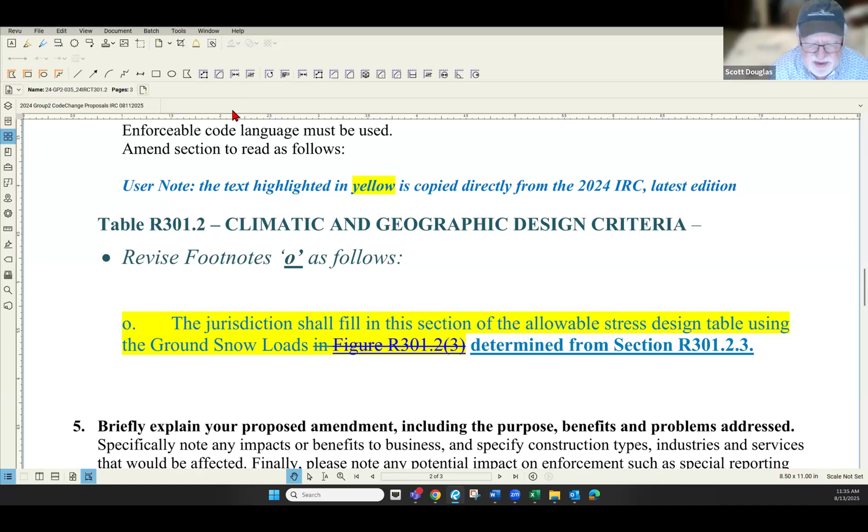We are on to 036. This one was a BIAW one. Patrick, you indicated that you wanted to withdraw this one and the next one. Yeah, yes, the vapor retarder and the EV charging.

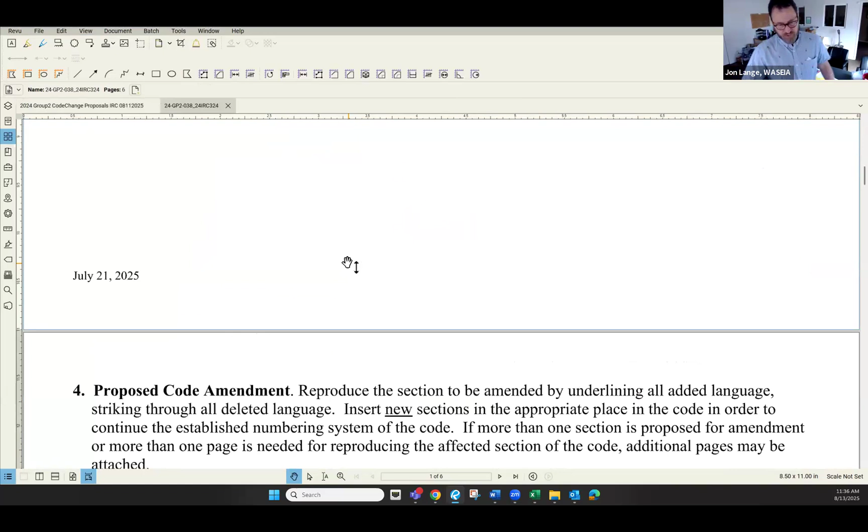Okay, so moving on to the WASEIA proposal for R329 solar energy systems, Gavin Tenold, and it looks like Jon, you're prepared to speak in his stead. Yeah, I just let him know that it's coming up, and he'll probably jump on very shortly because he wanted to speak to it. But this is basically one that's just harmonizing the pathway and roof access for photovoltaic

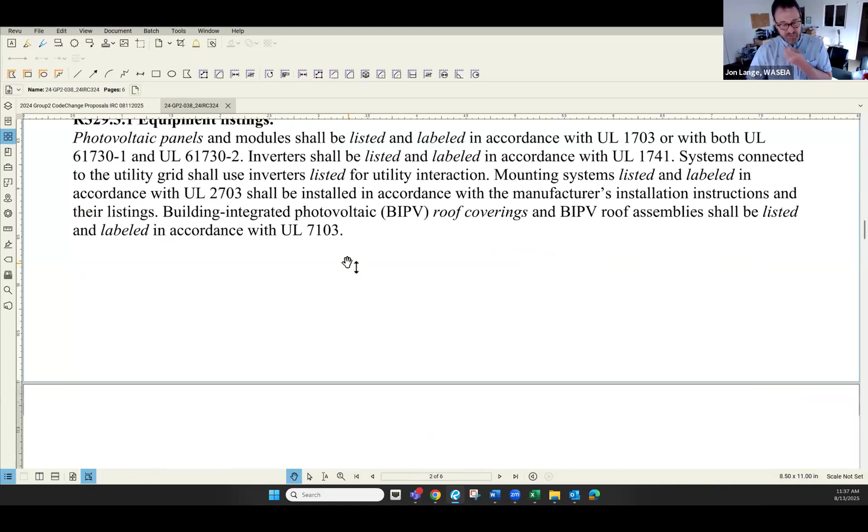with what was left out of the IRC, and it's still in the IFC. So we're just looking to get them back in the IRC, which they were in like 2015 to 2018, but they somehow are left out, but they remained in the IFC. And this is a result of the Council Opinion 2309, which kind of solidified that this is the intention.

And this, if I characterize it, provides a little more flexibility that's present in the IFC for solar installations on the roofs, correct? It does. And it kind of rearranges it in a better flow as well.

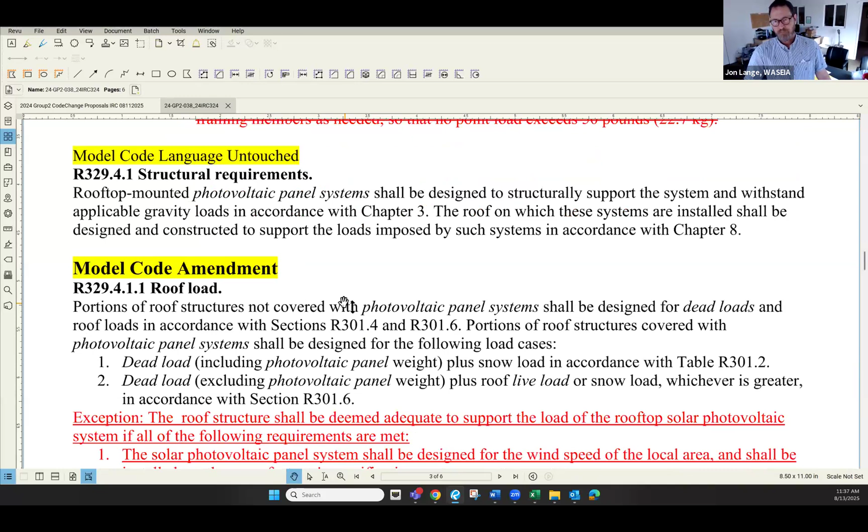Okay. Any comments for Jon? And if - oh shoot, the name's escaping me - Gavin. If Gavin's not available, and he pops on and wants to speak back to this one, we could rewind back to it. Sure, okay. Any comments or questions for Jon while we're here? All righty, seeing none, we will move on from 038.

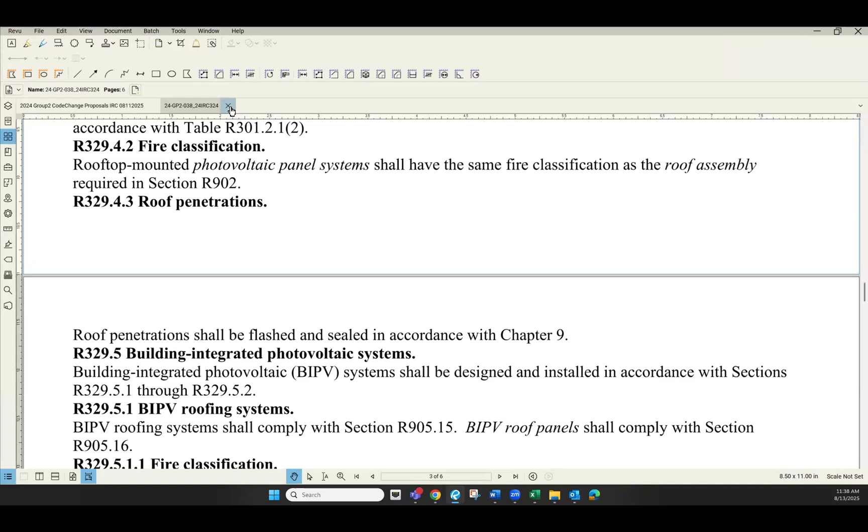All right. Now, 039 is a Ken Brulette proposal for IRC 311 carbon monoxide alarms. And Ken, if you are on, the floor is yours.

I see Ken's profile online, but he's not unmuting. So for this one, I will - oh Ron, go ahead. I have several issues on it. I think it's one of those that it's a good idea, but it needs some real work. We have sleeping rooms, we have sleeping areas, we have bedrooms, none of which have definitions, and they're kind of flip-flopped and interchanged throughout this code proposal. So that should get clarified in order to make this thing work correctly.

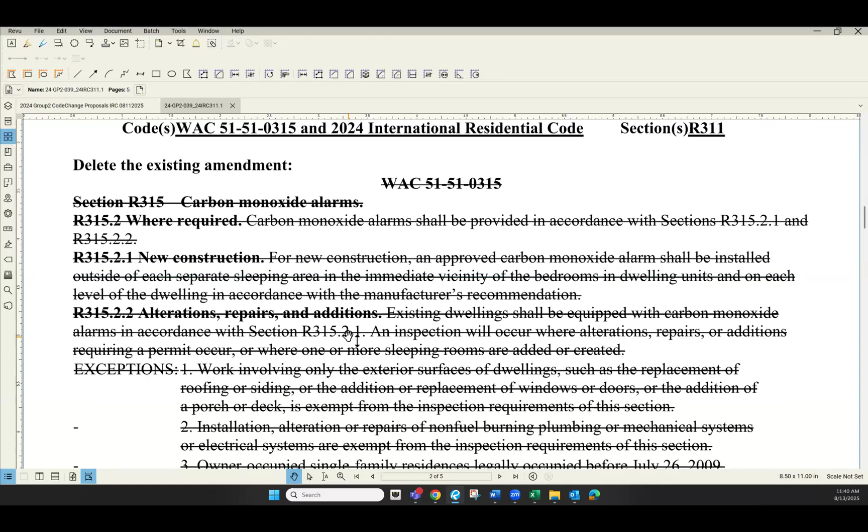But in addition, it looks like he's adding in some sort of an added inspection or pre-inspection by the local jurisdictions, and I'm not sure that the local jurisdictions are ready to step forward with that. And then he's also adding an interconnection requirement between the carbon monoxide detectors that they're adding in multiple areas. So I think before it went very far, after clarifying the issues, this needs to have some sort of an economic analysis done.

That's it. All did I lose everybody? Oh, okay. You didn't lose everybody.

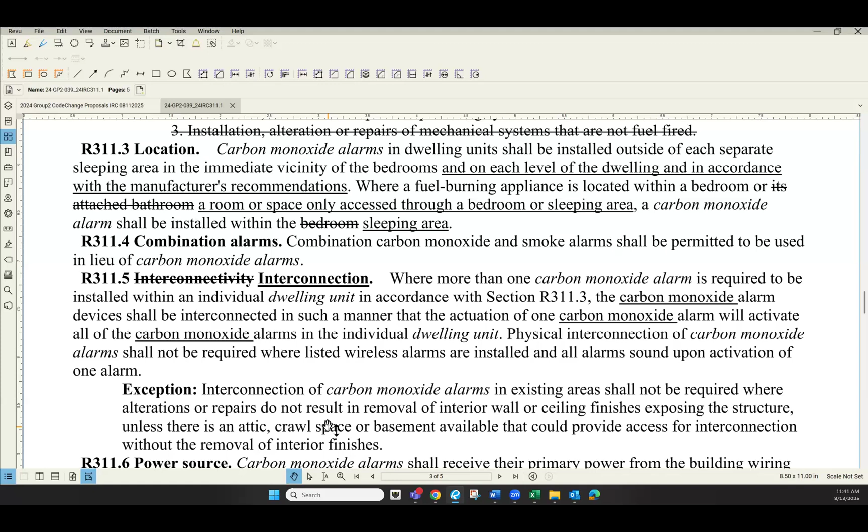Mariko: Yeah, this proposal I found a little confusing to read, and so I wish the proponent were available to speak. But I think that more things are underlined than are actually the intended changes. I think that a lot of the underlined changes are already changes that we make as Washington State amendments. And so the actual proposal is for fewer changes than it looks like.

I would agree. I think what Ken was trying to do here is we had the old section for 315, and so he's saying to strike all of WAC 315 in the IRC, and then he's showing all of the changes that would show up in R 311.

But Ken, you're unmuted now. Yeah, I'm sorry, I got pulled into something else. No sweat. I didn't think you guys were going to get to me. Did you jump over somebody? We had a couple that were withdrawn and a couple that went pretty quick. So sorry for the surprise.

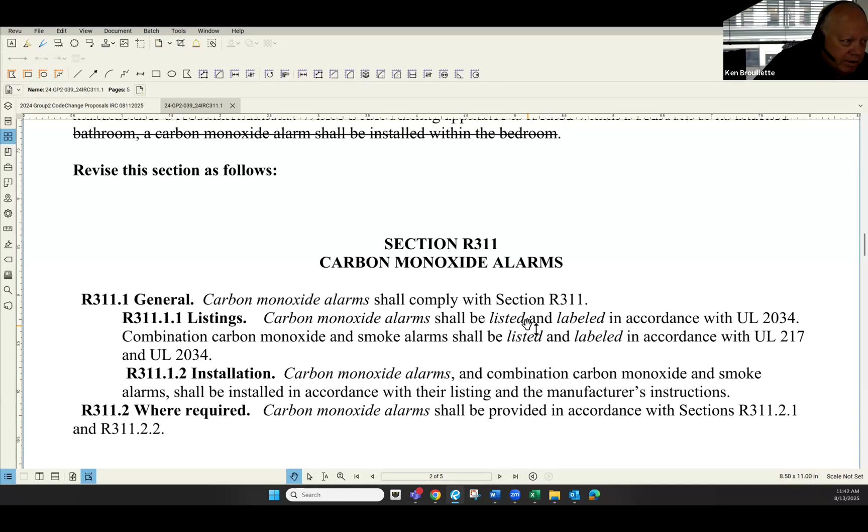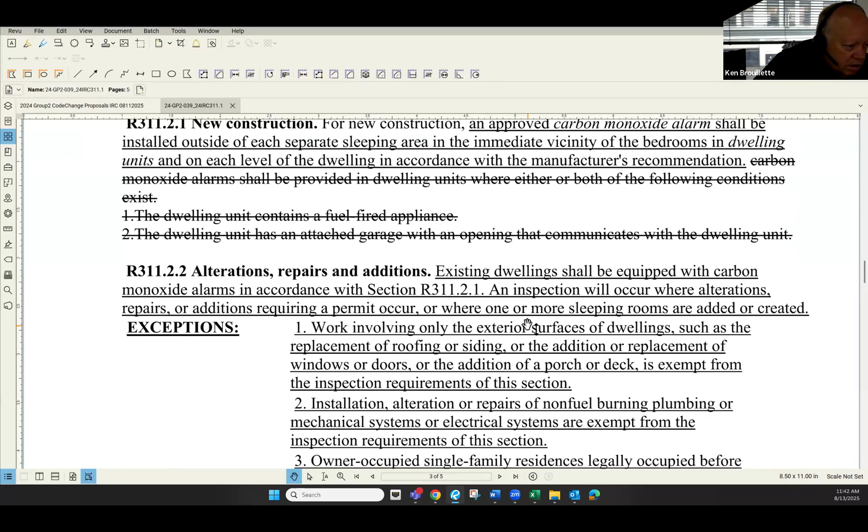Okay, so I heard you guys talking about, yes, it's a renumbering issue, and also just, yeah, basically just delete the existing state amendment and take the 2024 code language and tweak it a little bit, include some language in a proposal for RB 100, and just take some of our state amendments and lay them in different areas. I don't think it's too complicated. I think the explanation kind of explains it if you went down there and somebody read it.

So did you happen to hear any of Ron's comments on that? I heard nothing. Okay, Ron, if you wouldn't mind maybe restating some of those issues you were looking into.

Okay, yeah, Ken, so I think it just needs some tweaking and some work. We need to get definitions for sleeping rooms, sleeping areas, and bedrooms, because it kind of jumps back and forth in the proposal and makes it a bit confusing.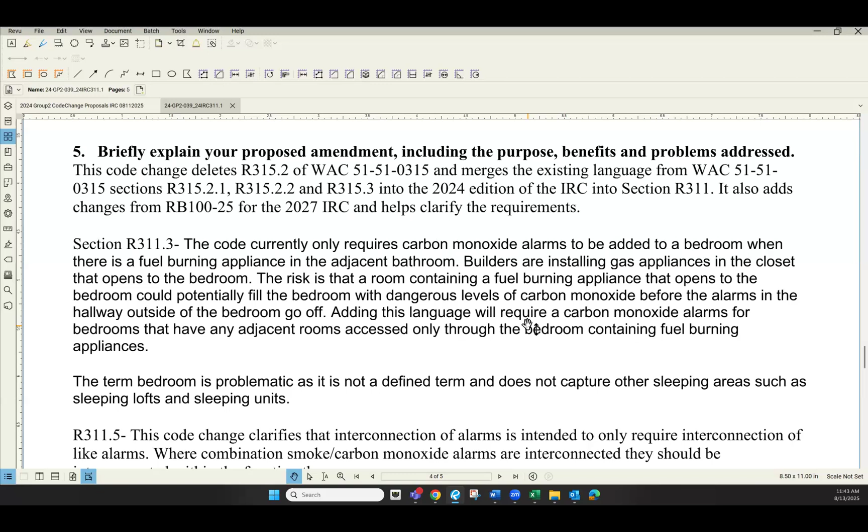And I'm reading in there, it looks like an added inspection being done by the local jurisdiction. And then the interconnection requirement for the multiple carbon monoxide detectors. So one of the things I was suggesting is that a cost benefit analysis should be done on it before it got too far along.

Okay, so let's start with the interconnection part. Where's the - they're already required to be interconnected.

All the carbon monoxide detectors? Yeah, the only thing I'm adding is clarifying that it's carbon monoxide. That was just a clarifying code change. The whole section talked about alarm devices, it was just clarifying it's the carbon monoxide one. So it's already required to be interconnected.

Okay, I wasn't totally aware of that, so on the '24 code. And with regards to definitions, I'd have to double check since I don't have the '24 code open, to see if there's already a definition for sleeping area or not. I think we went through that last meeting or the one before, trying to resolve the definitions on sleeping areas and sleeping rooms.

The current text that I show up with has the words sleeping rooms in there, and we currently don't have a definition, do we? I don't think so. All right, so I haven't caused any more confusion then. But yes, it would be great. I can try, we can work together to come up with a definition that works. Okay, sure.

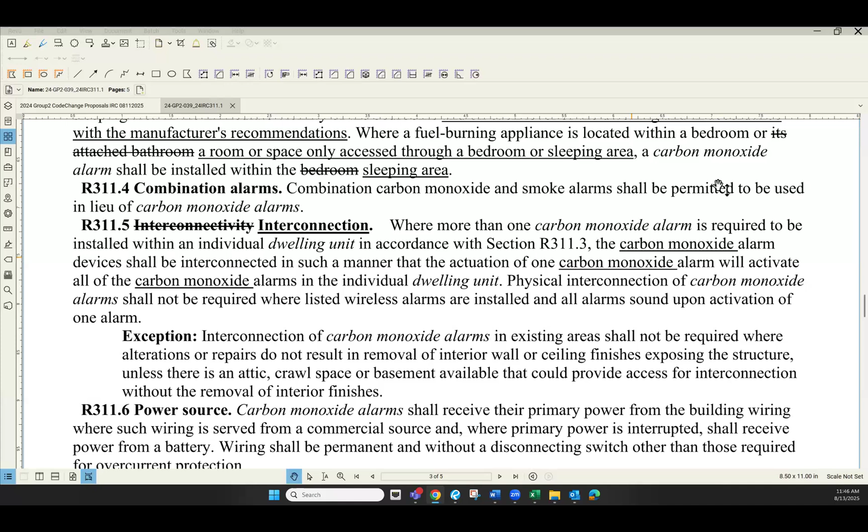Quinn, personally I actually like it. It gets us closer to a life safety requirement. If anything, I would even go further and put it inside the bedrooms instead of just outside the vicinity. Because almost every year, every winter, it never fails that there's one or two families that die from carbon monoxide poisoning. I've lived here since the 80s, and there's always news of someone dying because they put a propane or some kind of gas heater in their room, and they all die. So I think this gets us closer to that life safety requirement.

You bring up a good point. Ron, since you do so many home inspections, you probably don't remember, but you did mine back in 2019 when I bought a house in Gig Harbor, which I appreciate. Dave McCurdy recommended you. So I was quickly asking, since you do so many, how many homes are getting installed with combination carbon monoxide and smoke alarms? That helps what Quinn was just talking about with them being located inside the bedroom too.

Not very many, and most of them are something we write up when we do the inspection. The actual appraisers are the ones forcing the issue, because they won't approve the appraisal until the COs are installed. And then there's a requirement for one on each level.

Quite frankly, even though people may grouse, we should just make all smoke detectors dual purpose. Not even banter about it anymore, just say smoke detectors are required here, here, and here, and they need to be dual purpose smoke and CO. It would make life so much simpler for enforcement, and it would answer, like Quinn was saying, the life safety requirement. Even the one in the garage, if there's a CO out there and they're interconnected, it's going to trigger when the furnace malfunctions in the garage, that kind of thing.

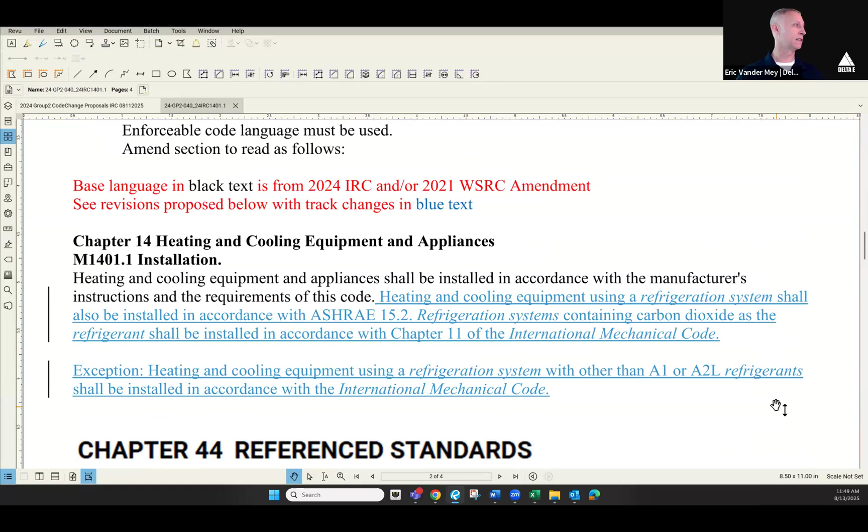This proposal, the first sentence added to section M1401.1, is based on the 2027 IMC code change proposal, which is referenced later in this proposal for the model code. So that's just a duplicate of that language. The second sentence, that refrigeration systems containing carbon dioxide as the refrigerant shall be installed in accordance with Chapter 11 of the IMC, is a new provision we're proposing to correlate to section 1301.1 scope provisions, which basically say anything outside the scope of the code, you go to the mechanical code, from the IRC to the mechanical code.

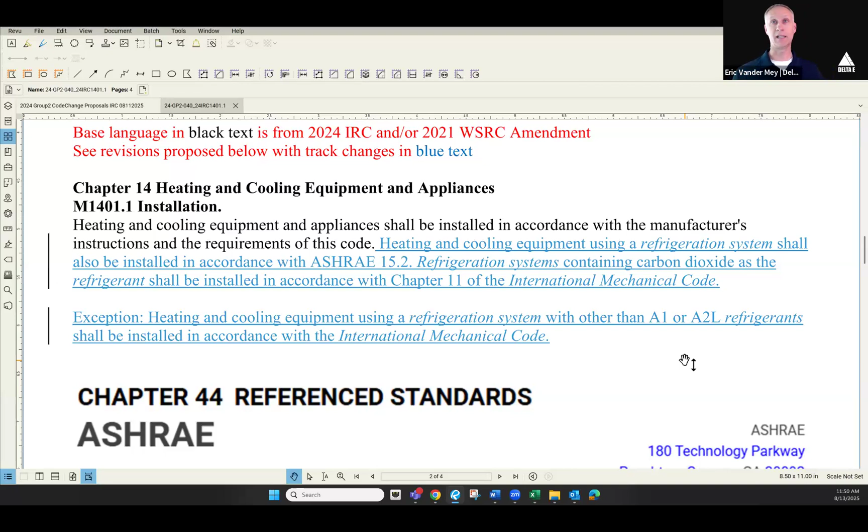So that's essentially just another pointer specific to the CO2 systems we're starting to see on projects to meet global warming and PFAS chemical climate change requirements. And then there's also an exception added, that anything not A1 and A2L is governed under the IMC. CO2 is an A1 refrigerant, so we do need that second clarification sentence in the charging language.

That's just some cleanup pointers in the code to correlate with the 2027 IRC, and a reference to ASHRAE 15.2-2024. That's something we've already adopted through the emergency rule on the mechanical code side, but now we're getting this into the IRC. This is the appropriate new standard developed specifically for single-family homes, townhouses, and low-rise multifamily, for how to properly use refrigerants. And referencing the latest version of ASHRAE 34, there's been quite a bit of work on the A2L refrigerants and others to properly classify both the LFL and RCL values for the EDVC calculations. So basically just pointers to get us up to current code standards for the 2024 codes.

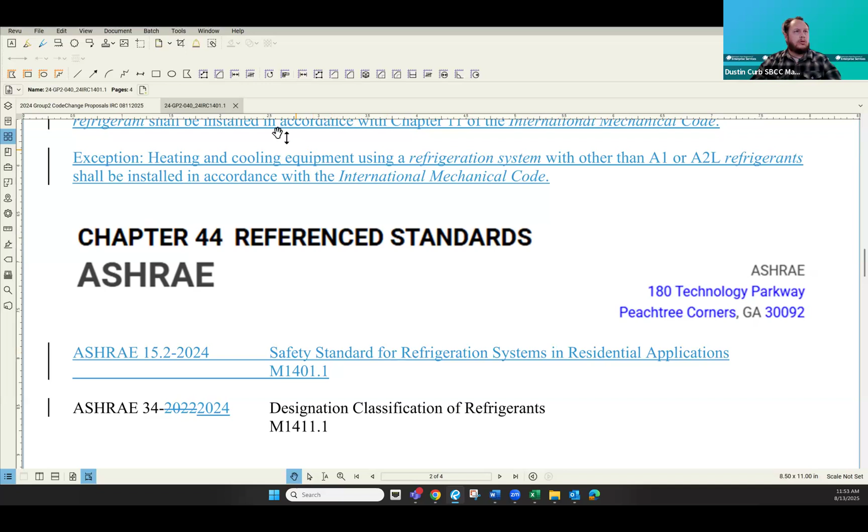All right, any last hands on this one? Seeing no unmutings, no hands coming up, we will get back to the main list. I believe the next one is the next couple. The last two that we hopefully can get to today are from Eric.

So 041 is on M1505 ventilation. And Eric, as this opens, the floor is yours. Yeah, so 041 is in regard to ventilation. These are changes to correlate with the 2024 code change proposals to clarify some of these definitions. This is basically editorial to coordinate what's already been passed by the mechanical code TAG for Washington State 2024. So it's correlation of these definitions so they match between the IRC and the IMC for Washington State.

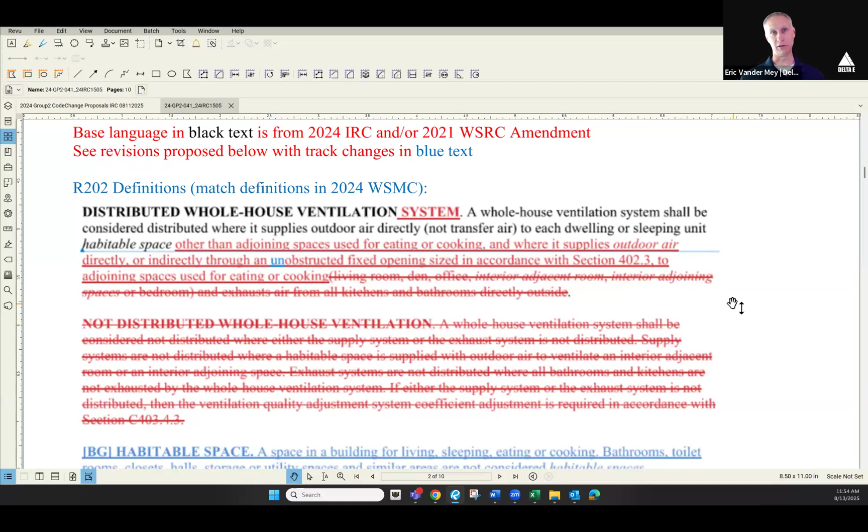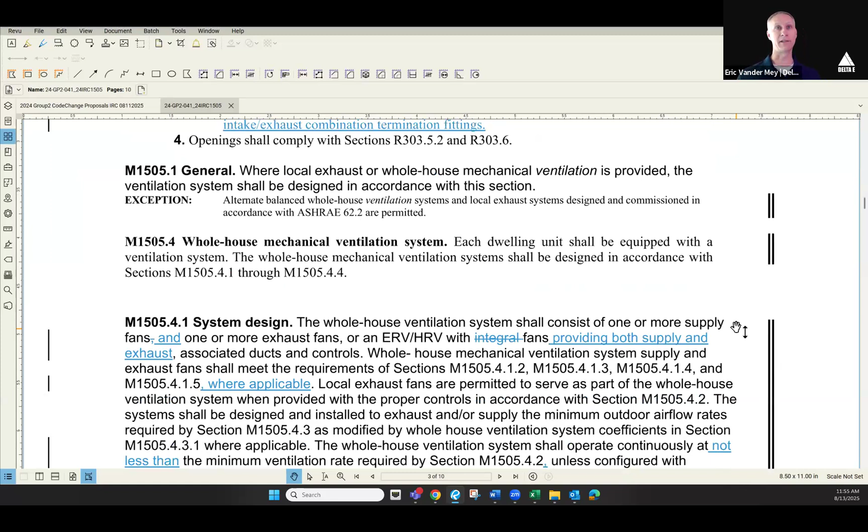This new addition of the habitable space that was discussed, the new terminology between interior adjacent rooms and interior adjoining spaces, clarifies those requirements in regards to ventilation. So all this is just tracking to make the Washington State mechanical code match the residential code, and to also clarify some interpretation questions that the State Building Code Council answered on the 2021 code. I can try to answer any specific questions, but we're trying to just get the language to match between the two codes.

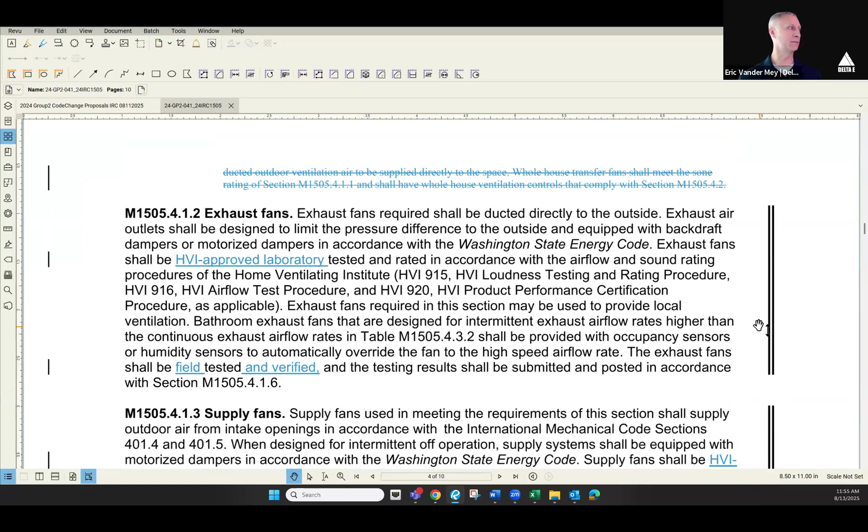Boyd, I saw your hand up, but it's down. All right, if there's no other questions or comments, we'll move on to 042.

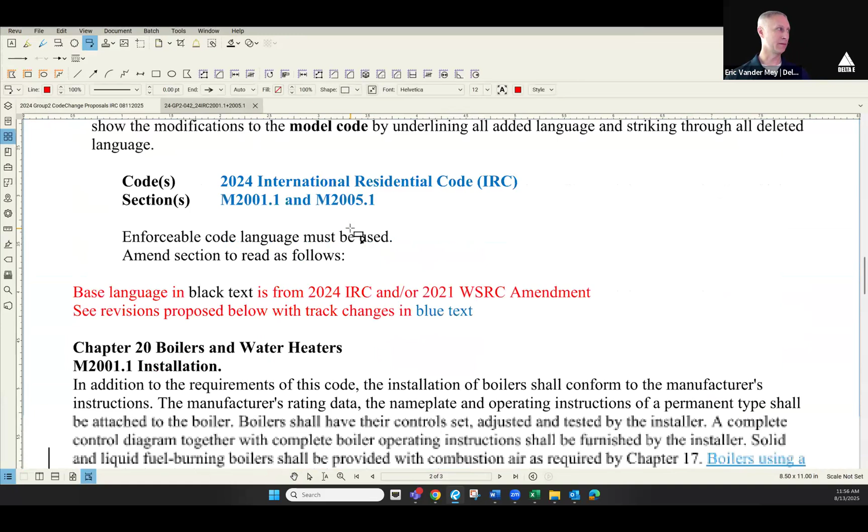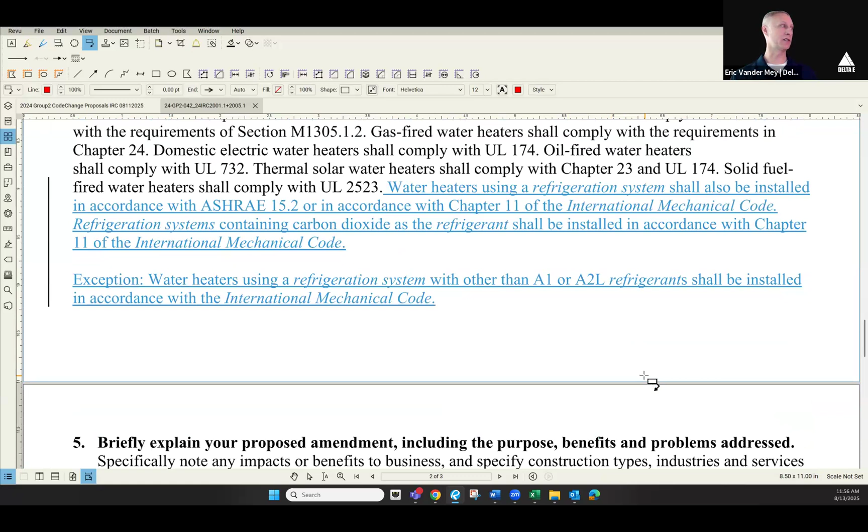So 042 also has to do with refrigerants. This is a new pointer in chapter 20, the boilers and water heaters section. We're seeing heat pump water heaters in residential uses being promoted by the energy code, whether those are units installed interior or units installed exterior as split systems to the residential units. So this again is the same language as in the previous proposal we looked at. We're just being clear that these have to be installed per ASHRAE 15.2 or per Chapter 11 of the Mechanical Code. So basically pointers to those code sections that we have to properly use these refrigerants.

Any comments or questions? Seeing no hands coming up, I appreciate the presentations, Eric, and we will show the rest of this one. This 043 we discussed earlier this meeting was going to be withdrawn as well. And that brings us to the end of the public proposals received by the IRC tag.